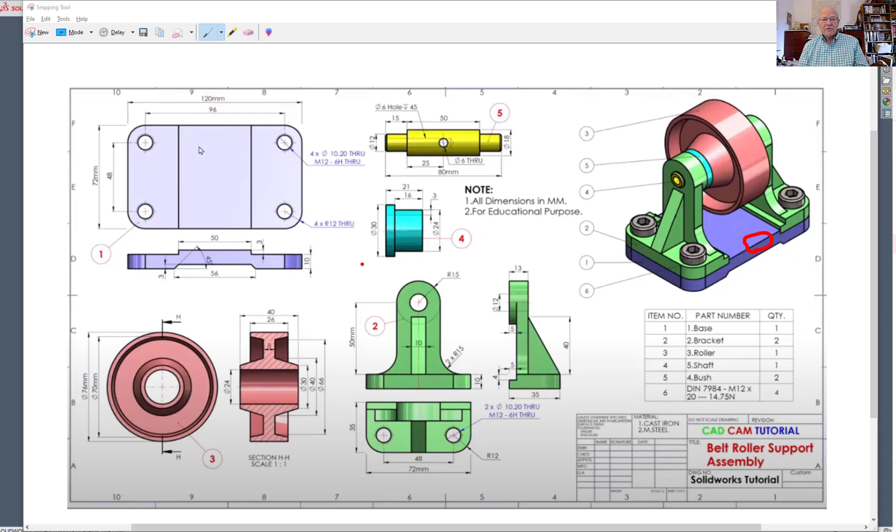Let's go to SolidWorks. There are two ways you can start this. You could make the base as an individual part file and then bring that into an assembly, or you could build the base in the assembly itself. I'm going to do it that way, just so everything starts with the assembly.

So I'll go to File, New, and I'm going to start a new assembly file. I actually have templates set up myself, but you probably won't, so let's start with Novice. Oh, I updated SolidWorks and I haven't yet cleaned up the templates, but that's why we'll just start with a blank template.

Now, the first thing it does when you start an assembly by itself is it asks you, what do you want to use for a part? So it goes right into the Open dialog box for files. I'm not going to open anything, so I'm just going to close that.

Again, I could have made a part and opened that part in the assembly, but instead, when it asks me what I want to do, I'm just going to pick the green check, which just leaves everything blank.

Coming down over here, I want to make sure this is in millimeters, although this is a sort of weird little thing in SolidWorks. Every time I make a part in this assembly, I've got to check those units, and it's quite likely that those units are set to inches for each part.

So I will go to Insert Components, and I'm going to start not with Insert, but with New Part. It all automatically comes in with a little green check, and what it's asking is, put this on the plane you plan to draw on.

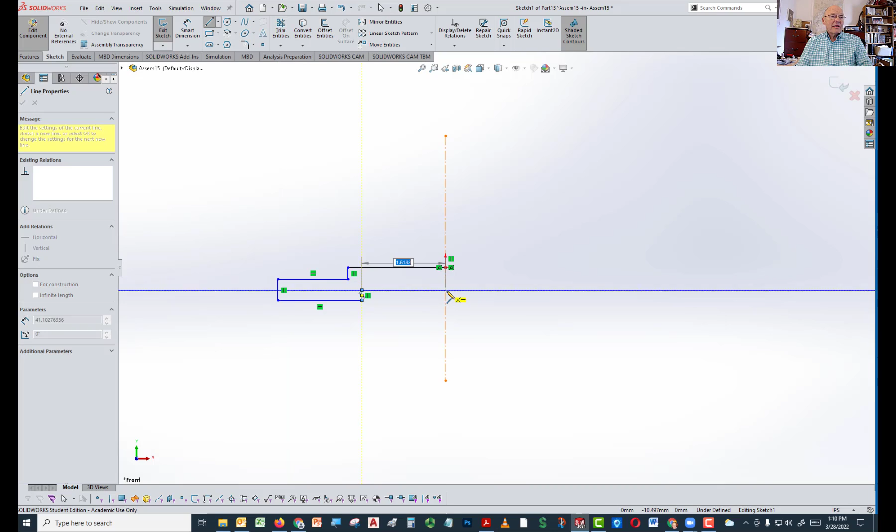I'm going to actually start this right on the origin, so the origin is going to be on the top of the part itself. I'm going to come over, down a little bit, over a little bit, down a little bit, come back, go up, come back over.

You don't have to be very careful with this because you're going to put dimensions on it anyway, as long as it's close. Even if it's not that close, it'll still work. Make sure copy is checked off when you do the mirror on something like this. It comes across like that because it's a symmetrical part.

And you'll notice, indeed, it changed from millimeters to inches when we went into the part files. I'm going to change that back to millimeters before I place any dimensions.

Now the parts listed over here, at the moment it's blue because we're working on it, and everything else is grayed out, but it's the only thing we're currently working on. I'm going to go over here and right-click on the sketch and edit it.

Now I'll start putting my dimensions in now that it's set for millimeters. I'll have to do that for every part we create here. What I probably should have done is change the default setting from inches to millimeters, but that's okay.

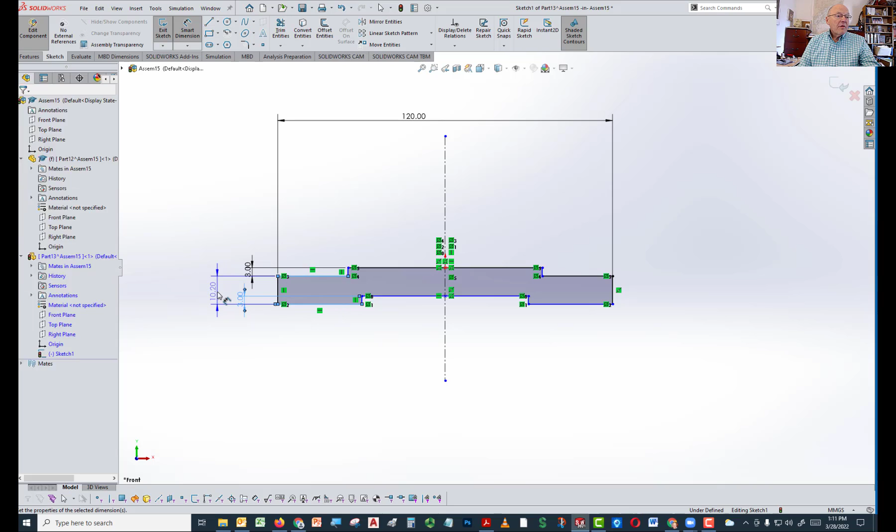So the overall length of this is 120 millimeters. You put that in like that. That depth from here to here is 3 millimeters. The depth from here to here is also 3 millimeters. And then that distance from here to here is 10 millimeters, and that width right here, I've got to look at it and see. It looks like it's 50.

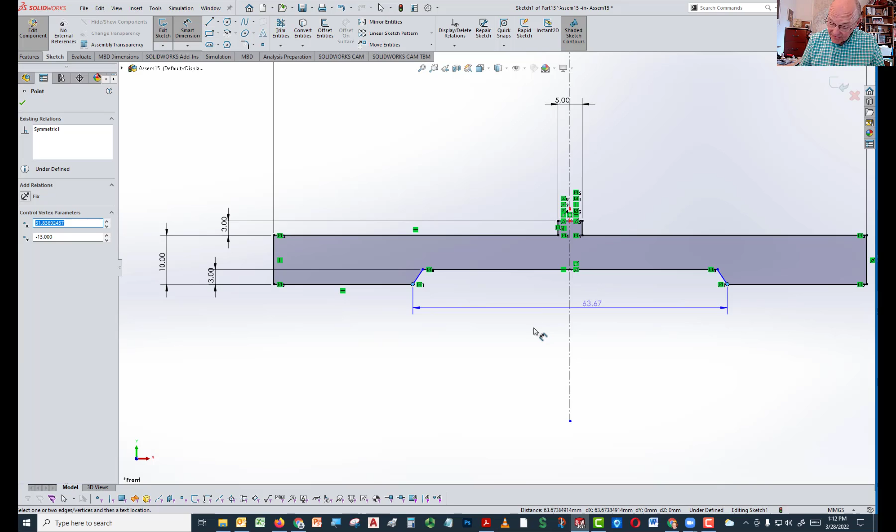Oh, this looks a little different than I thought. It's actually not vertical, it's got a little angle to it like that. You'll notice it changes on the other side as well. So the distance from here to here on this is given as 56.

And now I'm going to have to drag this over a little bit. Oh wait a minute, something weird happened. I typed in a 5, I guess, and not a 50. Didn't even notice when I did that.

There we go. Now what I'm going to do on this is bring that point over a little bit so the angle goes the right way. That angle was given as 45 degrees. So I'll just pick 2 lines here, bring it down, make it 45. And that should be fully defined, and it is.

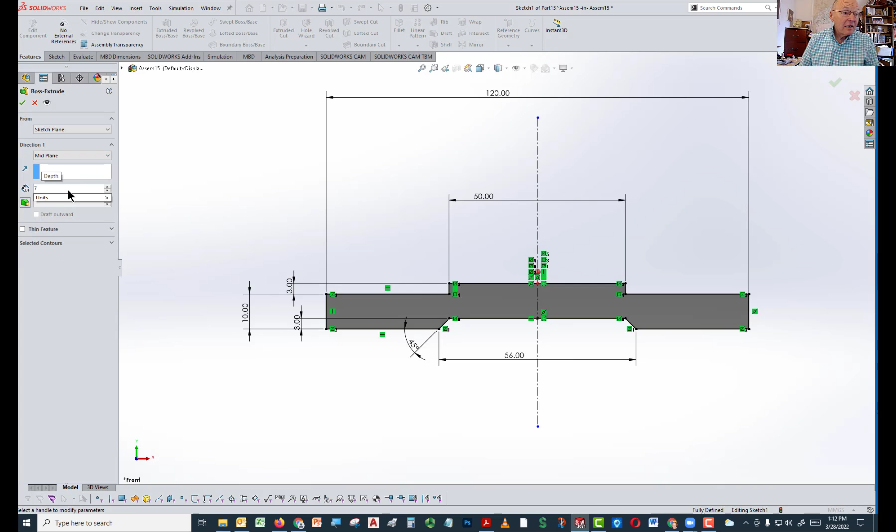Now the thickness of this is 72 millimeters. I'm going to do a mid-plane extrusion. So I go to Features, Extrude, not blind, instead mid-plane. 70, I just said it but I forgot, 72. So now it looks like that, and that puts everything right in the middle. All the planes on this part go right down through the center.

Now I'm not going to put the fillets in yet, because there's always a tendency in a case like this to put in the fillets and then use the center of the fillets. I'll just show you what I'm talking about here. You've got holes here, and those holes happen to be in the same location as the center of the fillets themselves. But if I change the corner fillets after making the hole concentric with the fillet, that would change the location of the hole.

So what I'm going to do is make the holes 96 millimeters apart and 48 millimeters apart by putting the first one in place. And there's a couple ways I could do this. I could measure that from the center of this so that everything stays symmetrical. That's not a bad idea, but I also could just go from one edge in. So it really depends on what my design intent is.

My design intent is to have that always be 12 millimeters in from the sides. Those are the dimensions I'd use. If my intent is simply to make it symmetrical about both planes, then I might put it in the other way. Let's just say no matter what I do to this, I always want those holes to be in 12 millimeters. So that's what I'm planning to do, and that's what I'm going to do here.

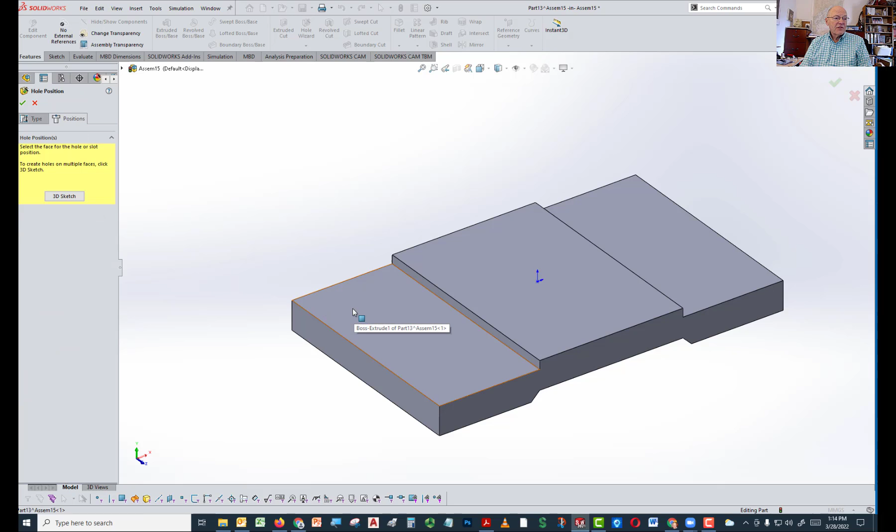So now I'll go back to Features, and on Hole Wizard, we use a Hole Wizard on this. We could just use circles. First thing I'll do is put in the type. Now let's go to position first. I'm going to put the position of one hole in on that surface right there. Now I'm going to dimension that.

When I dimension it, it's going to say 12 millimeters from each side. Again, that's the same as the fillet, but I'm going to put that in independently so that the fillet doesn't control the hole. I could make the hole control the fillet, I suppose. But I'm just going to leave them independent on this one.

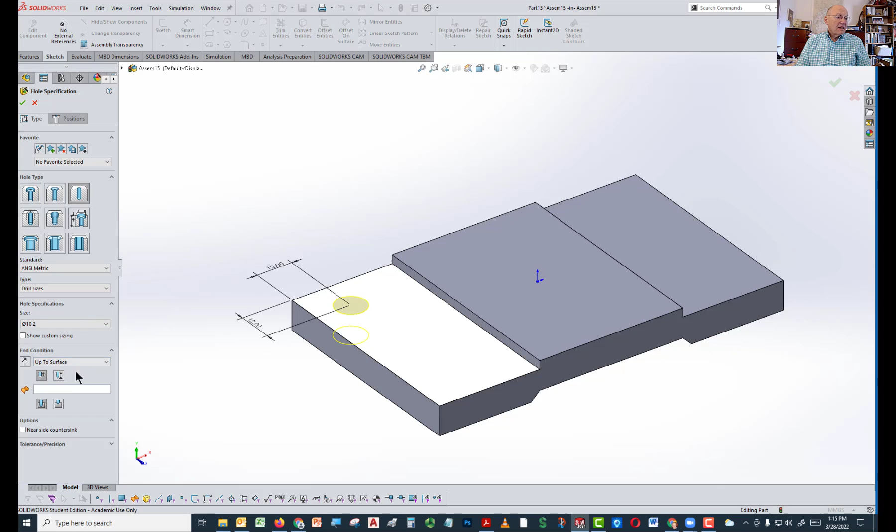All right, so there's my hole. Now I'm going to say I'm done with the dimensioning. I'm going to go back to the Hole Wizard and change the type. It's going to be a drilled hole. The hole size is 10.2. So I'm going to go down under ANSI metric drill sizes and see if there is a 10.2. There might not be, it might not be a standard size, but there is right there. Now I'm going to go up to surface, which I think is always the safest way to do this.

Pick the surface to start from and the surface to go to, and you're less likely to run into a problem with complex parts. The hole's in there like that.

Now what I want to do is mirror this around the planes, not the planes in the assembly. I don't even think it'll let me do that. We'll find out. But the planes in the part itself.

So when I go to do the mirror, I'll go up here to the Features tool, go over to Mirror, and let's just see what it does. Is it even going to let me pick that as a mirror plane? No. In other words, I've got to go to the part itself. That makes sense. I don't want to be mirroring around the assembly.

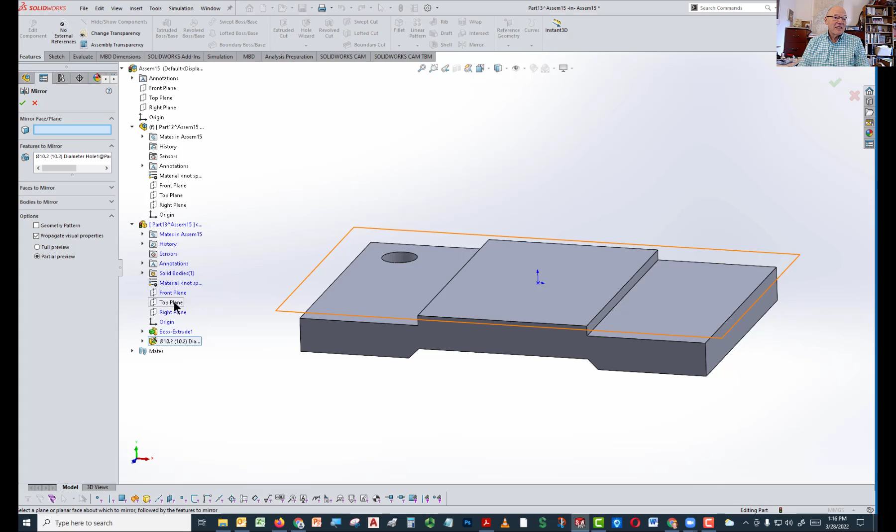I really want to be mirroring around here. So let's go to the right plane, mirror over there, say OK. Now I'm immediately going to go back to mirror, and this time I'm going to go down on the base and pick the front plane. Front plane mirrors the last thing I did, which is the other mirror, so now they're there.

Now those holes are always going to be 12 millimeters in from the sides. Now I can put in the fillets, and this would be a perfectly good time to do it. I put in fillets at the end, almost always. Again, in this case, I wanted them independent because I don't want the fillets driving the holes. Fillets at 12, looks like that.

Now that's everything I can do here for this part, and that's it — the part itself is completely done.

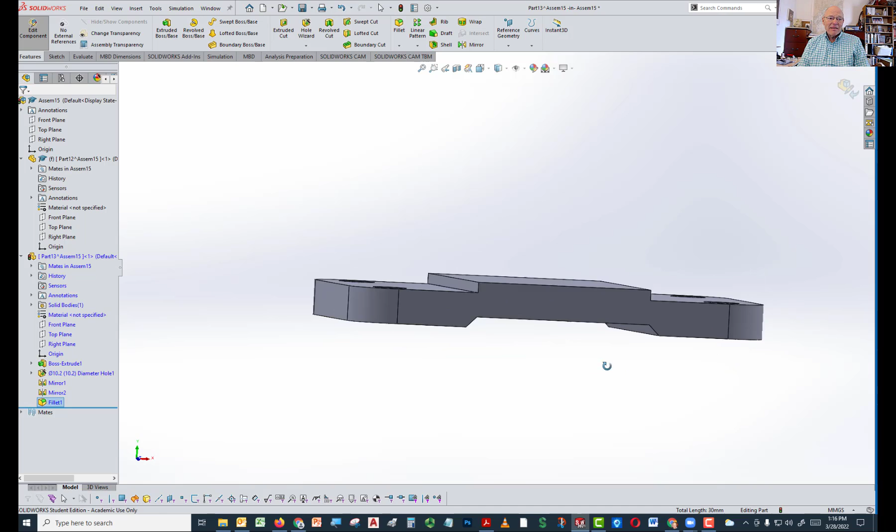What I'm going to do now is create the next part by using that surface to draw on, which means I'm now going to come out of this, and now it turns into a standard part over here. The only thing is, it does show you the way that it's identified here.

It shows you that that's inside the assembly. You can rename that if you want. Wouldn't be a bad idea to rename it bottom plate, for instance. So I can do that, but it's still inside the assembly.

Now when I go up to insert components, I'm going to insert a new part by making a new part in the assembly. And now again, I'm going to get that little check — don't pick anything in the assembly itself. In this case, everything from now on is going to be based on that part.

That makes sense? Yes. Well, let me just take a look at this. Let's think about how we're going to do that. I could build the base on this, and then once I've built the base, I could build up this part right here. Sure, let's do it that way.

So I'm going to put my sketch on the bottom of this. I'll build the base first, and then I'll add this other part to the base. That base goes all the way in, up against the edge, so it sits right up against that edge right there.

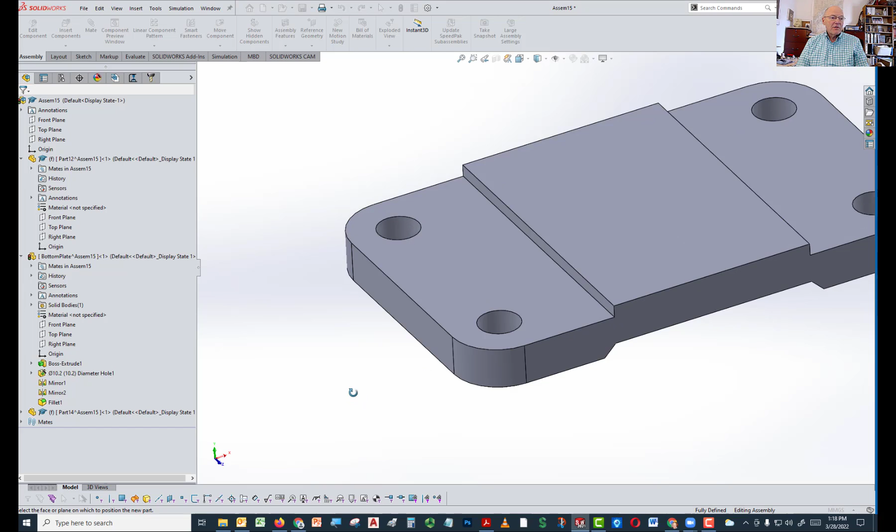So I can either use that surface or this surface from the vertical line, or in fact I could use that front surface. Let's do it on the top. Again, this is the kind of decision you make based on what you think will be easier down the road as you start making changes. So I'm going to pick this as my surface.

Now I'm going to convert entities. I'll do a convert entities, and I'm going to pick this surface right here, and I can pick that surface like that. Now I'm going to convert all the entities of that surface onto the surface that I'm sketching on.

I'm also going to convert entities again, and I'm going to pick the holes. Now that makes the holes of the part I'm making dependent upon the hole size in the part I just selected, the base. It also makes the overall outline the same — it's going to be controlled by whatever changes are made to the bottom plate.

Pick OK, and that looks good. I just need to know how thick to make that. Let me look at my notes.

10 millimeters will do it, so then I'll go over to features, extruded boss, and make it 10. This one's going to be blind, so it goes up.

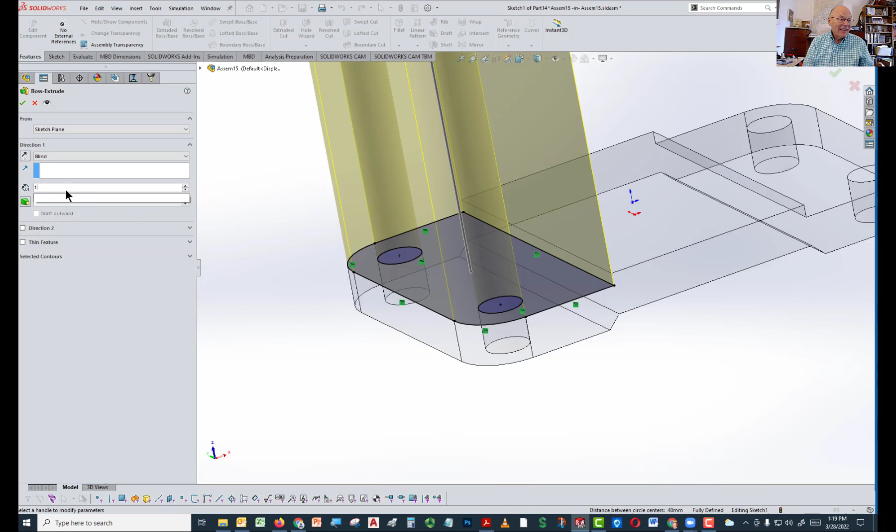Oh, and once again I forgot — every time you make a new part, it goes to whatever the defaults of the standard default value are. So when I typed in a 10, it made it 10 inches. I'm going to type a 10 again with an mm, and now it's 10 millimeters.

Now it's probably a good idea for me to change this to millimeters for the rest of these, so I'm going to do that. So now as I'm building this, I get the right units in there without having to type in the mm.

There's a little notch out of this right here, so I'm going to put that in there right now. I'm going to sketch on that surface, put a little corner rectangle, start it here, and drag it off like that. Looking at the drawing, that notch is 4 high and 5 wide. So it's 5 this way, and 4 this way.

First time I've made this particular part, by the way, but that's okay. I'm going to do this in the same way that you would build something for the first time. 5 and 4. Okay, now I'm going to do an extruded cut.

On an extruded cut, I think your best bet is always to go up to surface. Now there are times on really simple parts where you can go through all or up to next, but up to surface guarantees that your intent is always maintained. You know where it's going to start and where it's going to stop, no matter what.

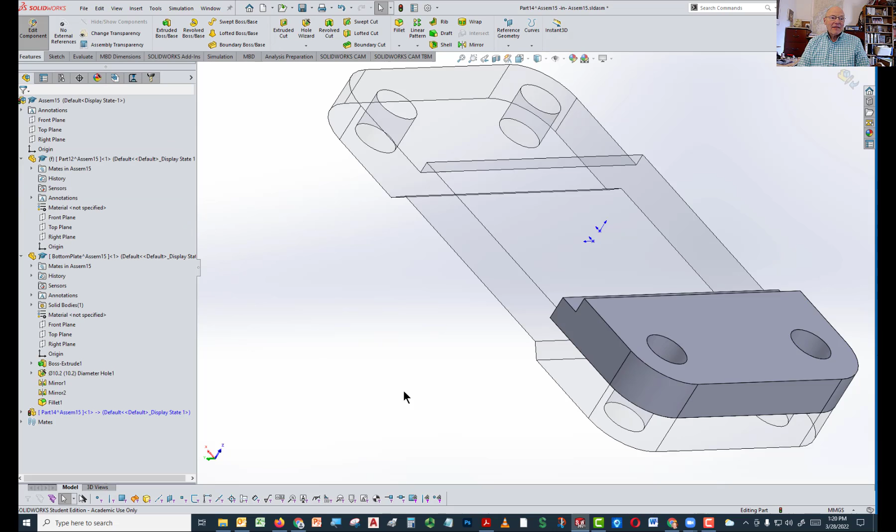Right now what I want to do is build in the piece that sticks up, and I'm going to do that by putting it on this surface right here. I'm going to build it on that surface. So I'm going to go to Sketch, pick the sketch, do that one. Let's look at this from the right so I can see what I'm doing.

I'm going to put a center line on here, and that center line is going to go from here right down to there. Now I'm going to draw a circle at the end of the center line, and then, since I am in millimeters, make that circle the diameter of the top of this, which is going to be 30.

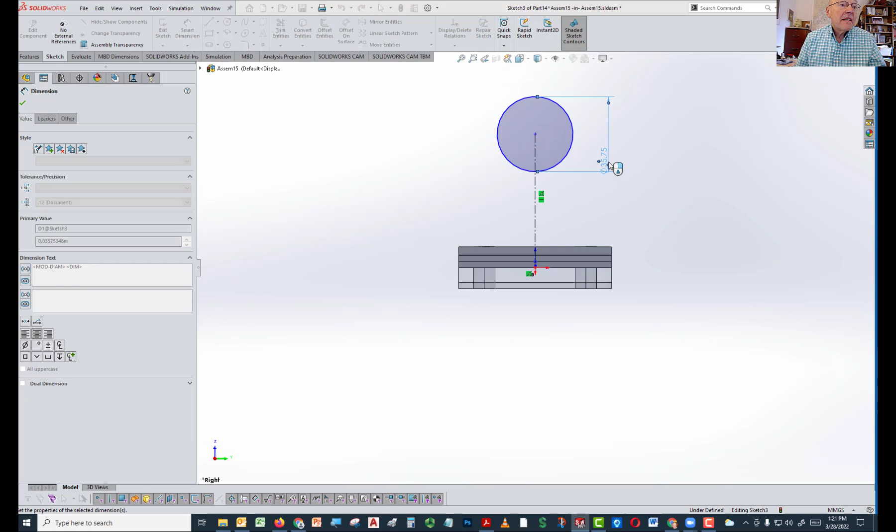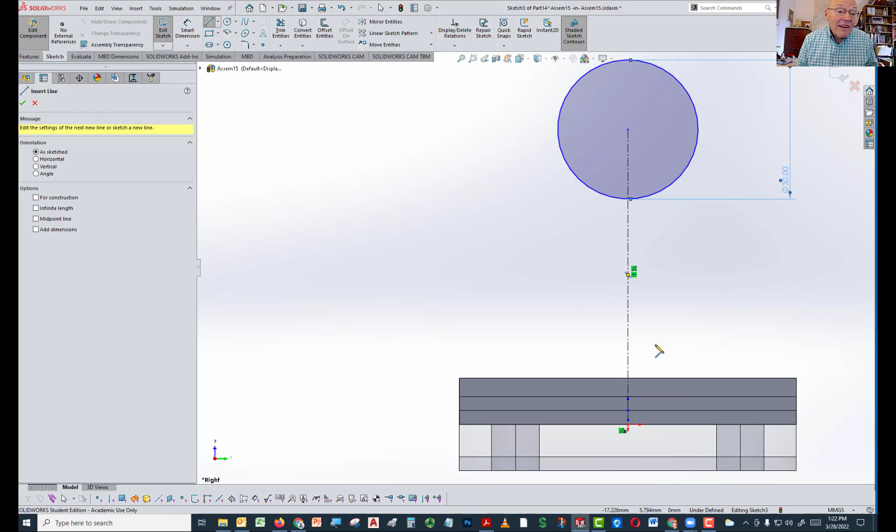Now I'm going to start sketching. I want to make sure I sketch on where I really mean to be. I want to start sketching on that line right there. So we're going to go to the line command. I'm going to start on this line, start right there, come over and have it stop here, and I want it to come up till it touches here.

Is that what I want? Let me see something. No, no, it's not what I want. And what I want to do is sketch up here. So I just started in the wrong place. I'm just going to start over again and get rid of that.

I want this to be on this surface up here, so I'm going to go to the midpoint of that line to start with. I'll start right at this midpoint if I can get it to come up. And there it is. Then I'm going to come over here to that surface. Now this comes up above, it comes up higher than the top of that, and it's 10 millimeters, so we'll put that in a minute.

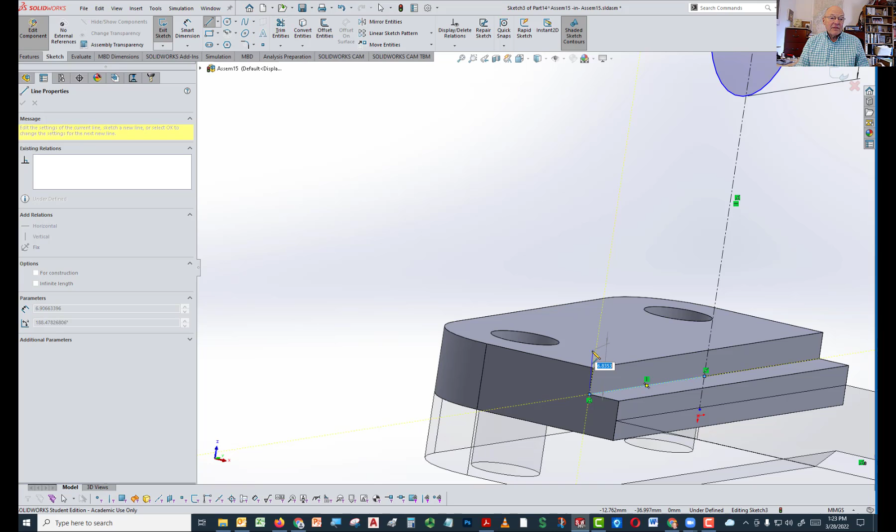Also in a minute we'll change that so it's vertical. So then it's going to come over here, and it's going to come over until it lines up with the quadrant of this top. I can go and acquire that quadrant and bring it down. You can see it's got a tracking line. I can also add that as a feature later on.

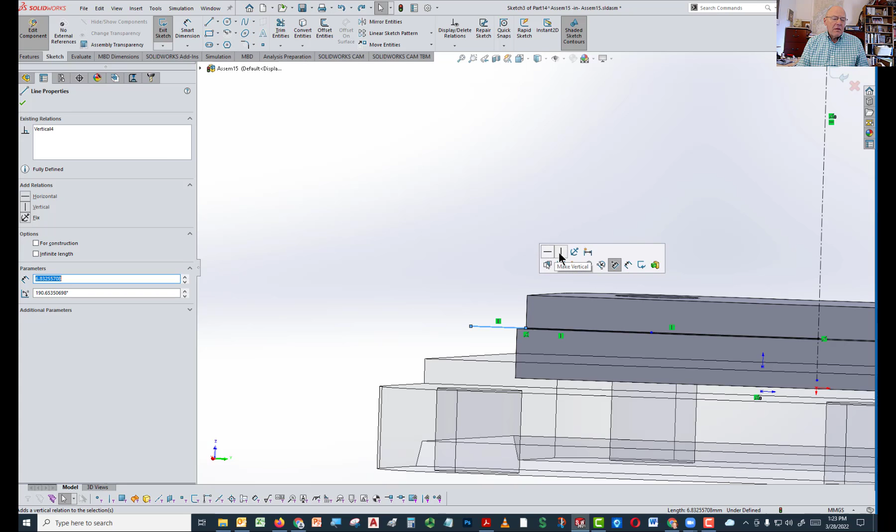Now I just need to make this vertical, just because that's a little sloppy. I need to make this vertical. No, why not? Because of the orientation and the way... all right, well, it's going to have to be horizontal. It just thinks it's drawing in a different orientation than I did.

That is a surprise a little bit, I'm not sure why it did that. All right, well it did, so that's the way it is. Now I'll go ahead and draw a line from the quadrant of the circle and go straight down to here, and make sure that's also... and it's not, so I'm going to make that. There we go, I just need to reverse my thinking. I've got this turned 90 degrees according to it, apparently. That's what's going on with that.

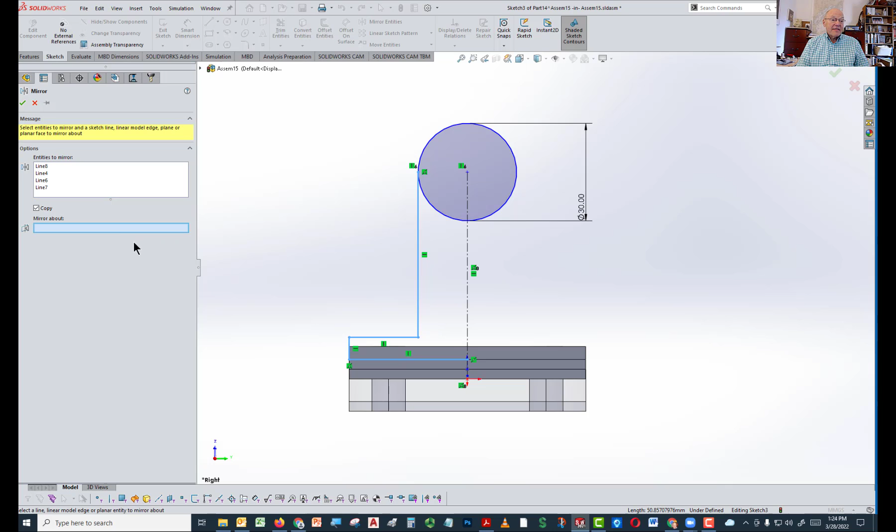Now what I'm going to do is mirror everything. I'll mirror this line, and so I'll mirror all of these lines, about the center line, bringing it over here like that.

Now I'll add these dimensions in. You notice I haven't really put many dimensions on here yet, because I'm letting the base drive a lot of these dimensions.

And the other thing I need is a distance from here, and that is given on the part from the top of this. So that goes from here, and that dimension is 50. Looks like that. Now I'm going to trim out.

Where's my trim? Right there. I'm going to trim out this and this. That should be fully defined, and it is.

I might as well go ahead and put the hole in this, because it does go all the way through, and it is concentric with that. So now I'll make that hole size the size given, and the size given is 12. So there's a 12 millimeter hole there. That's 12 as well. All right, we have a fully defined sketch now.

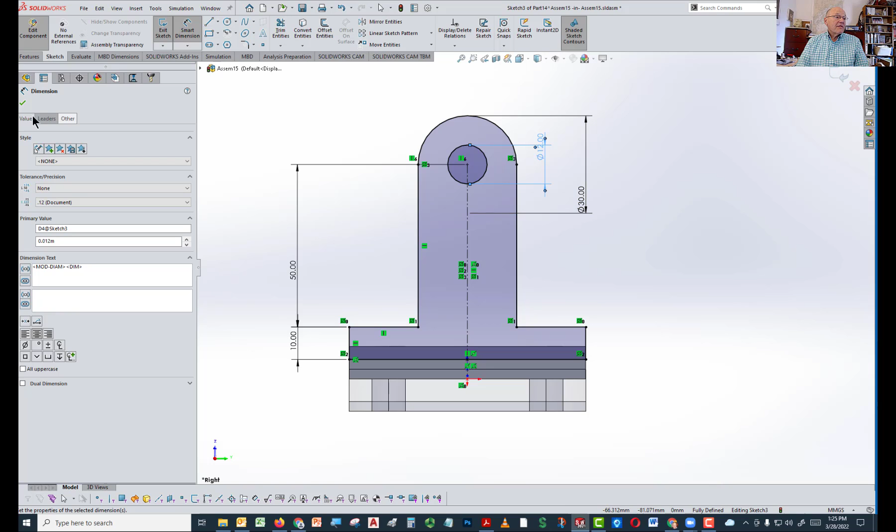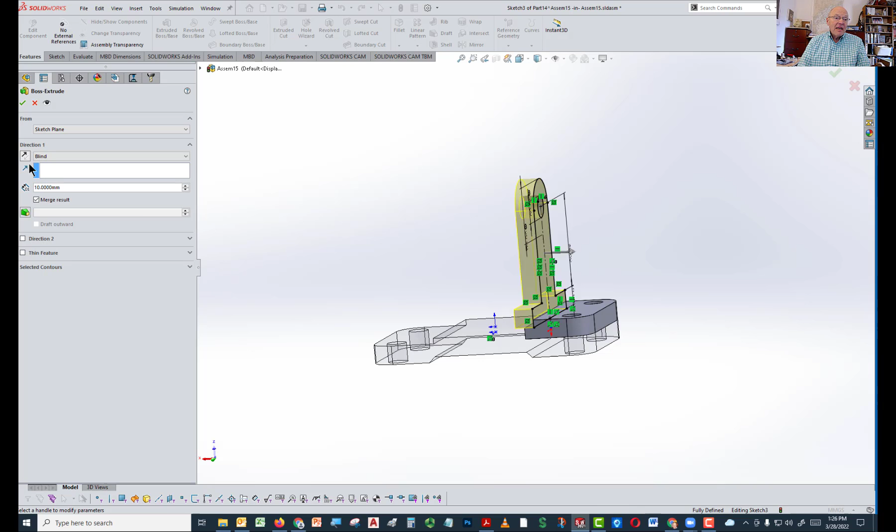Come back over here. What I'm going to do is extrude that 10 millimeters. When I do that, I want to make sure it goes in the right direction. It's going the wrong direction now, so I'll flip it. Now, it doesn't hit those holes, so it's not going to cause me a problem now. It's just going to merge, as long as you've got merge selected over here.

So now that's what the part looks like, believe it or not, with that little step in it. Not sure what that step is for, but it has the little step. And we can move from there.

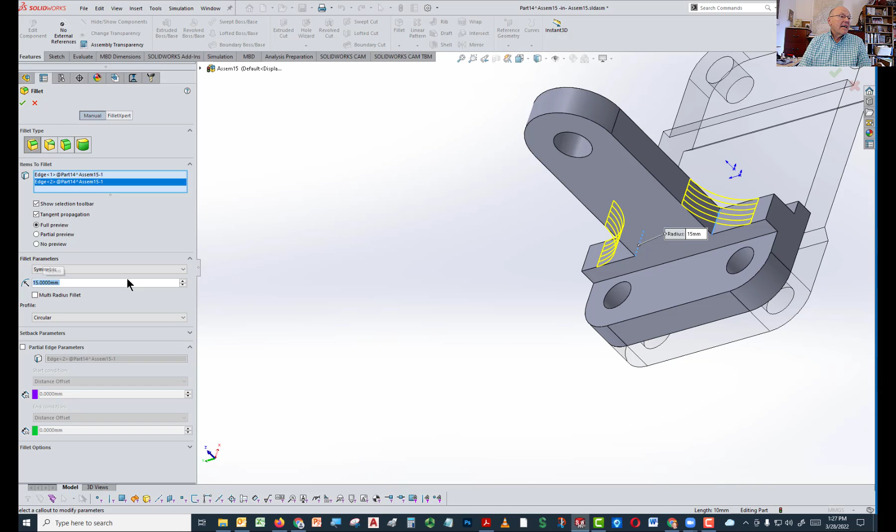Now there's a fillet in here that is part of the overall shape itself. That fillet has a radius of 15. I'm going to build that in now, just in case it causes anything to be different about the rib I'm about to put in. I'm going to take both of those, make them 15. Looks like that, and this is mostly what we have here now.

Now there is a support rib on this. That support rib goes down here at an angle, and in order to draw that, I'm going to do this. I'm going to look at it from the front, just like this. I'm going to draw on the plane of this that goes right down through the middle. So I'm going to do my sketch.

When it asks me what to select, I'm going to open this up on the inside, find the part that I'm currently working on, and I'm going to pick the front plane. I'm going to pick the top plane of that part. That's just the way it was oriented.

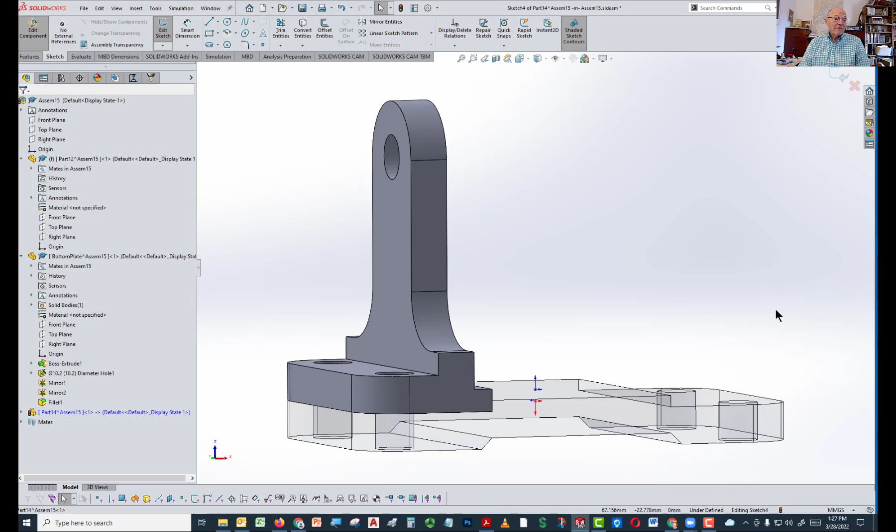Now if I look straight at it, I can draw a line that goes from that corner right there and goes up, and it stops below, stops up here someplace. Just make sure you don't hit the midpoint, because you're going to want to dimension this properly. And the dimension for that's going to be from here to the top. Should be 40.

Now that's fully defined. Now I'm done with that. That's my whole sketch. I could actually draw a triangle and then extrude it. I just want to show you how to put a rib in. To tell you the truth, right now I probably would have just drawn in a triangle and extruded it mid-plane, but I do want to demonstrate the rib function.

So in this case, I get out of the sketch altogether, go back over to features, and then I find the rib tool, and the rib tool is right there. It asks me to select a plane, a planar face, or an edge in which to sketch this thing. Instead, I'm going to pick an existing sketch. That's the option down here, and that existing sketch is going to be that.

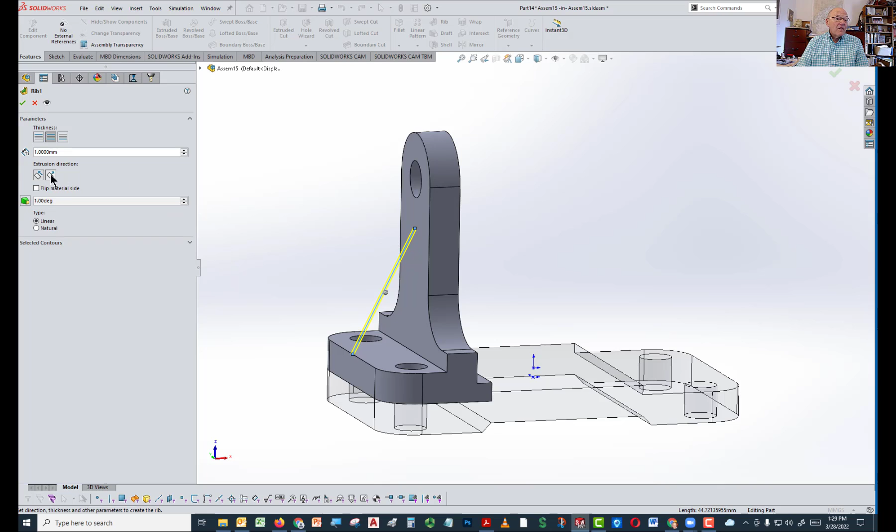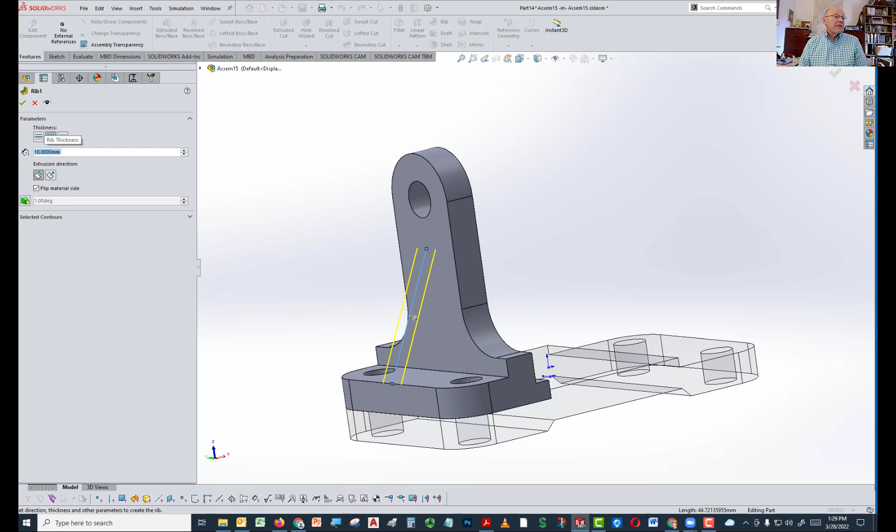Now what I want to do is make it go in that direction. Material side should be down here like that. And then the width of the rib, the thickness of the rib, was given as 10. I do that, pick the green check, and then it lays the rib in like that. That's a very helpful tool, so that's why I wanted you to see it.

There are no fillets on this, which is a little bit of a surprise. I think this would actually be a cast part, but the one that was given doesn't have fillets, and that's okay. We're just going to make this to demonstrate something anyway. But generally speaking, I would guess that's a cast part, so you'd have fillets all throughout here.

Come back out. Now I've got that part, looks like that, and it's right in place. Now what I'm going to do is use the mirror function in the assembly. The mirror function in the assembly is under linear component. I don't think it's anywhere else up there. No, right there.

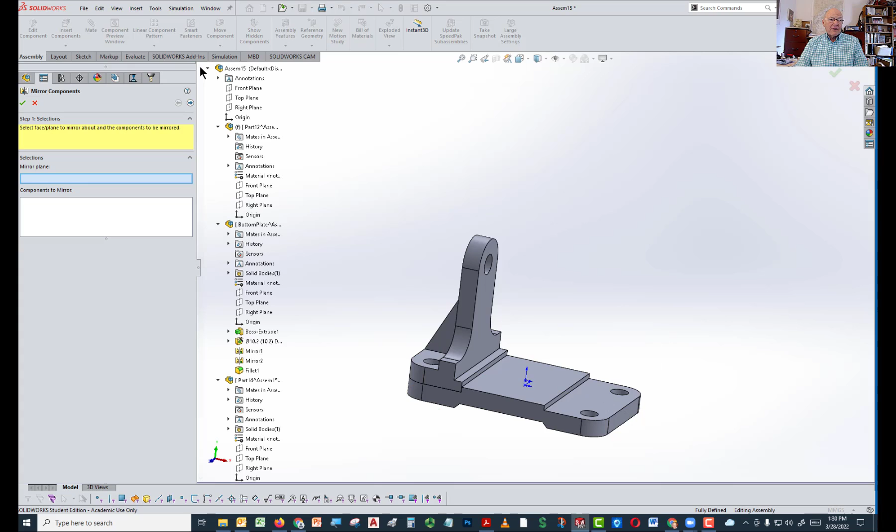So mirror function, and we're going to pick, once again, the mirror plane that goes down through the base, not the plane that goes down through the assembly itself. So I'm in the base, I'm going to the right plane, and then I'm going to pick the feature, or the component, that gets mirrored. That component is this one. Pick the green check, it comes over like that.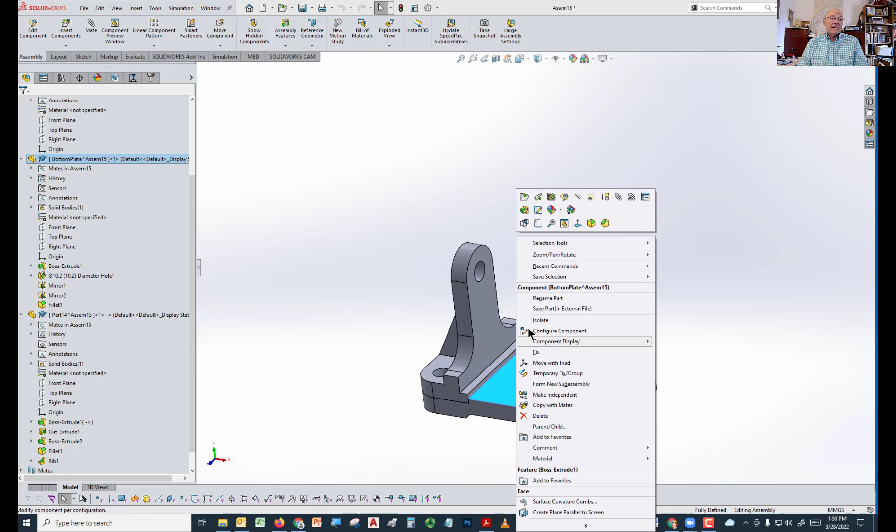Now so much of this was based on the base itself that if I go and make changes to the base, those changes are going to be migrated through. I'm just going to pause a moment here to show you that. So I'm going to edit this part right here, edit it in place. Everything else goes like that.

But watch what happens now when I come up here and make a few changes. I'll make this whole thing a little bit longer. I'll go in here and say let's make this 140 instead of 120. The whole part gets longer. You may have noticed that the parts I made here stay in place right now, but we'll keep going and you'll see in a minute what's going to happen with that.

So now I come back out of here and I'm done with that edit on this one. I'm still editing the part, but now you'll notice that the base of my side pieces, the axle supports, also got longer as well.

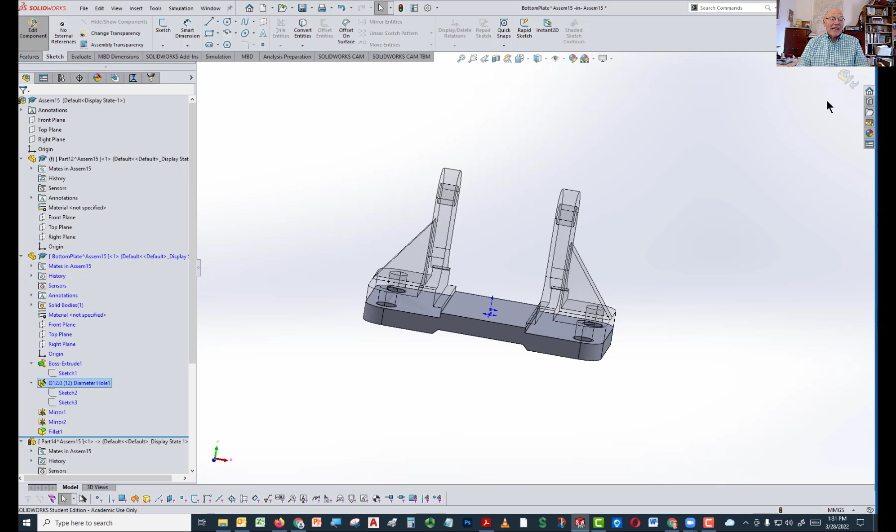Now what I want to do is go in here and edit the hole size. I'm just going to change the hole size so that instead of 10.2, let's make it 12. That means all these holes are going to get bigger. When I come back out of that, now everything has gotten bigger. The hole sizes have gotten bigger, the sizes in the axle supports have gotten bigger, and the axle supports have moved.

That's the purpose of doing top-down design and assembly. I'm going to pause my video and go back to the actual dimensions because I want to show you a few other things, but I do want to work this out with the dimensions that are there. Okay, now what I want to do is build the other components.

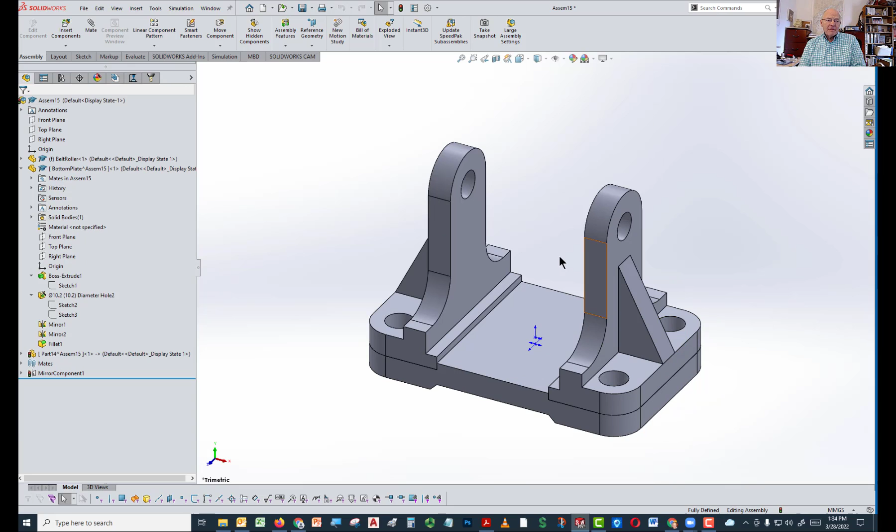I'm going to start, well, I could start with the axle. Let me look at something here. The way this is assembled, we've got a bushing that goes into the wheel and is going to be pressed into the wheel and then be free to move back and forth. So it's going to be controlled by the wheel.

The wheel is going to be controlled. Actually, it should be free to move back and forth a little bit, and the axle is going to be controlled by the bushing and by, looks like, the length of the 80 millimeters. I can't tell if that sticks out a little bit or not, but we'll find out.

So let's do this. I'm going to build the wheel right now, and I'm going to make sure the wheel is on the axis that goes down through the center of those holes. That's the main thing I'm concerned about. I probably will leave it so that the sketch is free to move back and forth, because there's probably a little bit of play in this wheel. I haven't really thought about this yet, or haven't done it yet, but let's try and see what happens.

So I'm going to start looking at it from the front. And again, I'm going to draw on a plane based on the base. So I'm going to draw on the front plane of the base. I'll go over here to sketch. Yeah, because I want it centered. So I'll go over here to sketch.

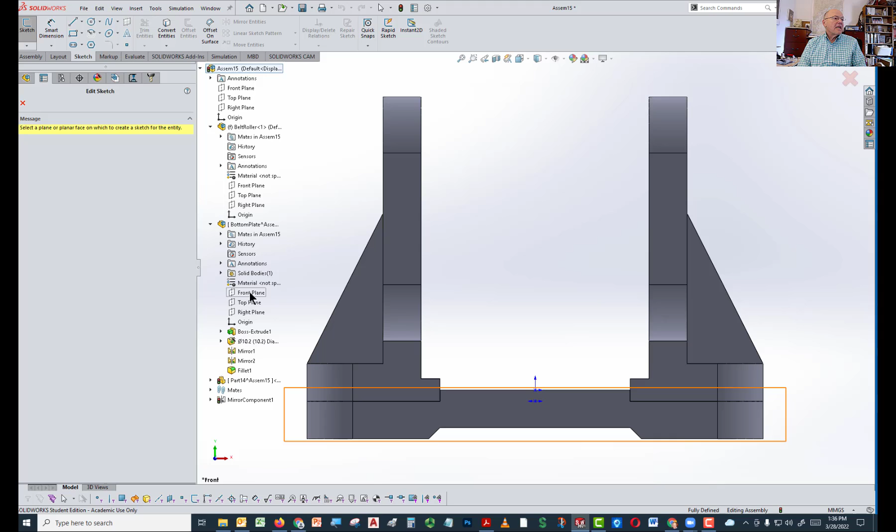Open this up, find the base. Bottom plate. Yeah, well, okay, that's the assembly itself. So we need to go down to the bottom plate. And on the bottom plate, we're going to pick the front plane.

All right, now I'm going to draw. I want it in the context of the assembly. I'm doing that on purpose. So what I'm going to do is draw a center line. I'm going to have the center line go right down through the center hole of this. Now the center hole of this is something I can't pick directly, but there are a couple of things I can do here.

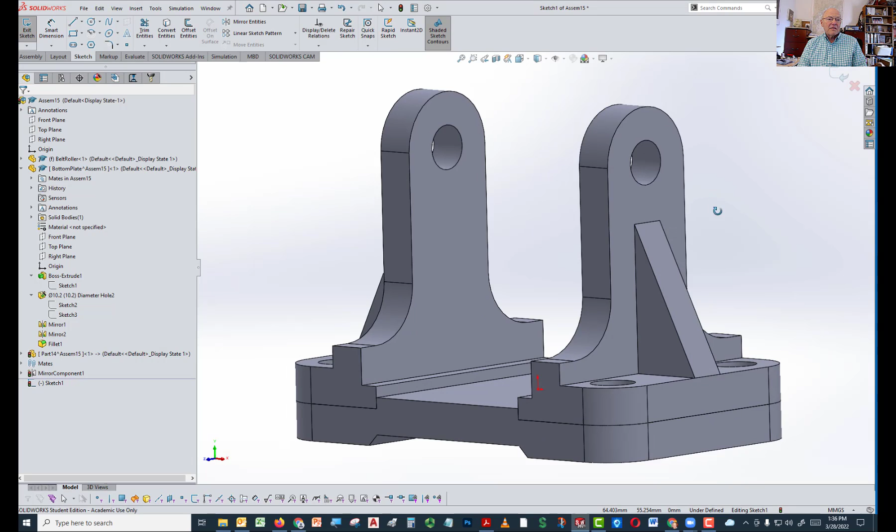One of them is I can turn on the center axes. Those center axes are the center axes of all the individual parts. And it's not showing for some reason. Oh, there they go, I had to turn on viewing. So you can see that when I turn those on, I have a little axis right here. So what I'm going to do is use that axis as a way of rotating.

I'm going to use that axis as a way of rotating the wheel around the axis itself. So I'm going to draw a new line that's connected to both of them. I'll come up here, go to the center line. What I want to do is snap to the axis.

I'm going to look at it from the front. I'll pick the axis right here and bring that all the way through here. That's just going to locate it up and down. I'm not concerned about side to side, but notice that's black now - I can't go up and I can't go down. So it's associated directly with the axis of that hole. If the axis of that hole moves, this moves too, and that's what I'm after here.

Now I'll start drawing the cross section of the wheel. To do that, I'll draw a line with a center line that comes down through here. But because I want to make sure the wheel is free to move back and forth, I'm going to delete that so the center line's free to move, and I'm going to use it as a way of mirroring the wheel.

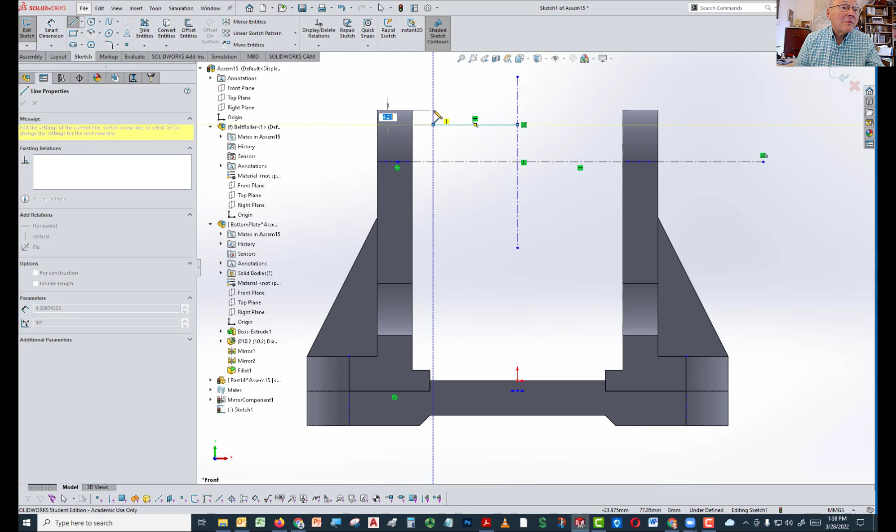So now the wheel is going to start here. There's a hole in the wheel, so we'll get up high enough for the hole. I'm going to come over, come up at an angle till about here, come straight up from there. Looks like we have another angle coming up, doesn't go quite as far. Comes up like this and then comes back like so. That's the rough shape.

Now I don't need to bring this center line up, but I'm going to do it anyway. The main thing is that it's vertical - that's my big concern here. Now I'm going to mirror these. I may decide I don't like what I just did, but we'll find out. So I'm going to mirror this over to here, like that.

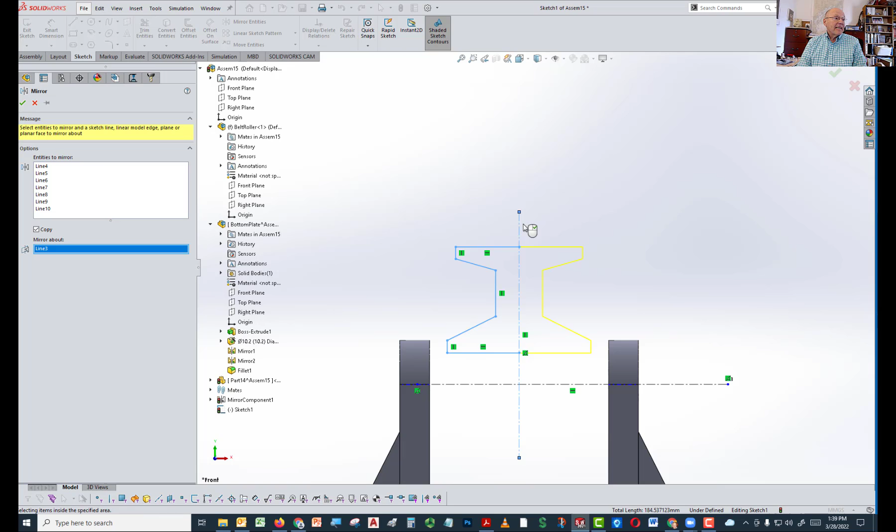This is going to be one of those cases where this is not going to be fully defined when I'm done. I think that's what I want, because I want to make sure it's still free to move back and forth so it has whatever play it needs, but that it is in fact defined in relationship to this. So I'm going to put a dimension on here from here to here, but I'm not going to nail that down side to side. We'll see how that works.

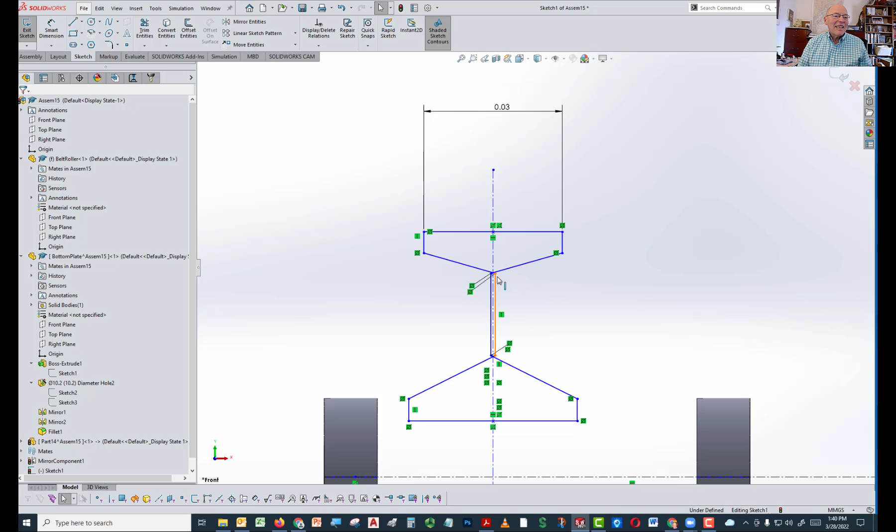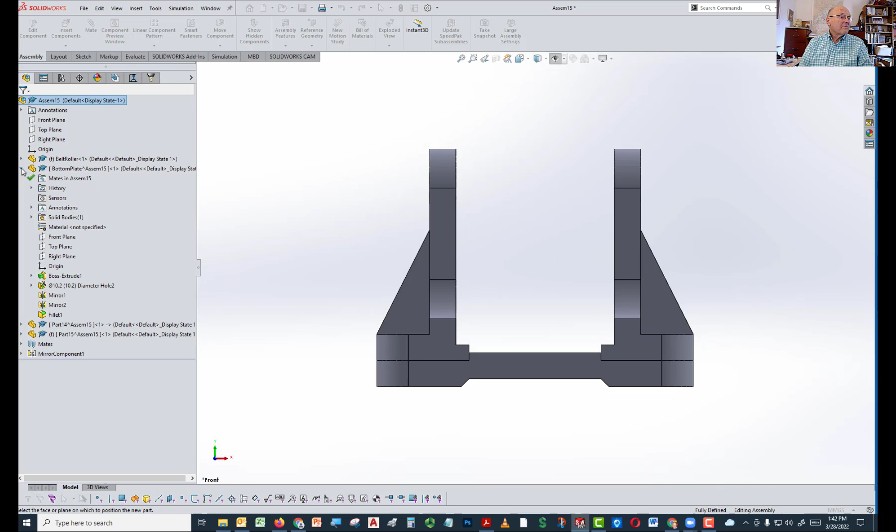Okay, now I want to make another component, so I'll come back over here to assembly. Under assembly, I'll say let's insert new part. Comes in as a new part. I'm going to draw it on the front plane of the base - that's where I want it located, because I want it centered on that. So I'll open up the bottom plate, which is this one right here, and I'll take the front plane of that, like so. Everything else disappears on me.

Once again, it changes to inches. I need to change that back to millimeters. Okay, now what I want to do is see the axis that goes down through the middle of this. So I'm going to come up here and turn those things on. Right now they are turned on.

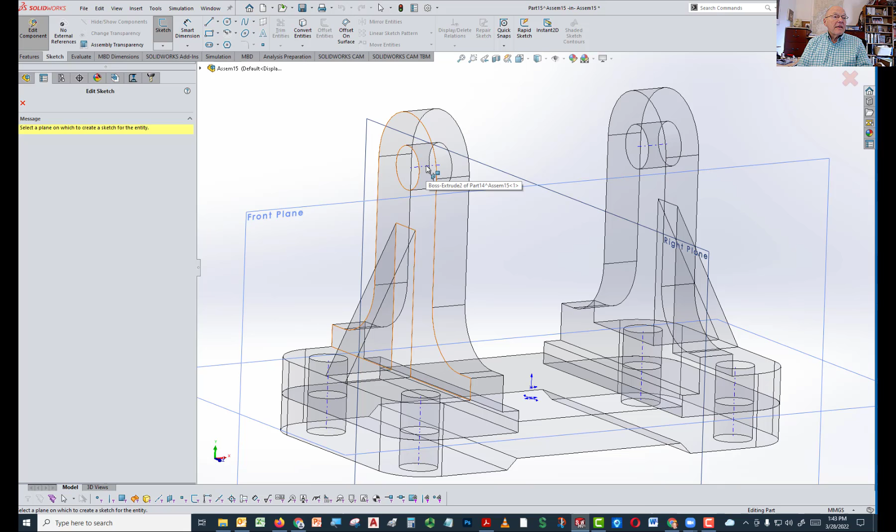Okay, so that axis right there is something I'm going to use, because what I want to do is draw a center line that is coincident with the axis on one of those, or actually both of them. I'm going to build the wheel around there - that's what I'm after right now. So you can see I can get a hold of that right there. I'm going to start by drawing a center line. I want that center line to be... can I get that or not? Let me see.

I guess the reason I would like that center line, that center axis, rather than that edge right there—that's a tangent edge, the extrusion of the tangent edge. I could do that, but the only issue would be if I ever wanted that round to have a different center than the hole, and that's not likely to happen. So I can actually use that tangent edge in this case.

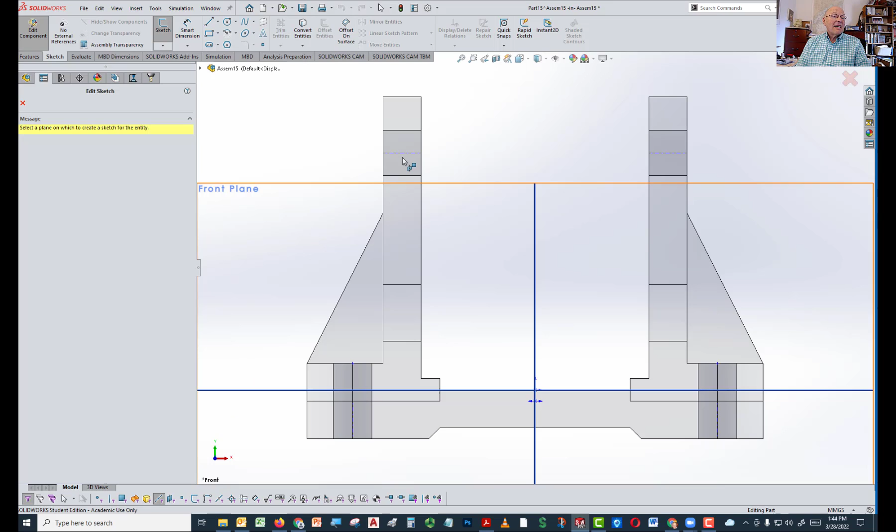I'd like to be able to select that axis. Let me see something here. If I go down and filter axes, and say all I want to do is select axes, that's the only filter that's on.

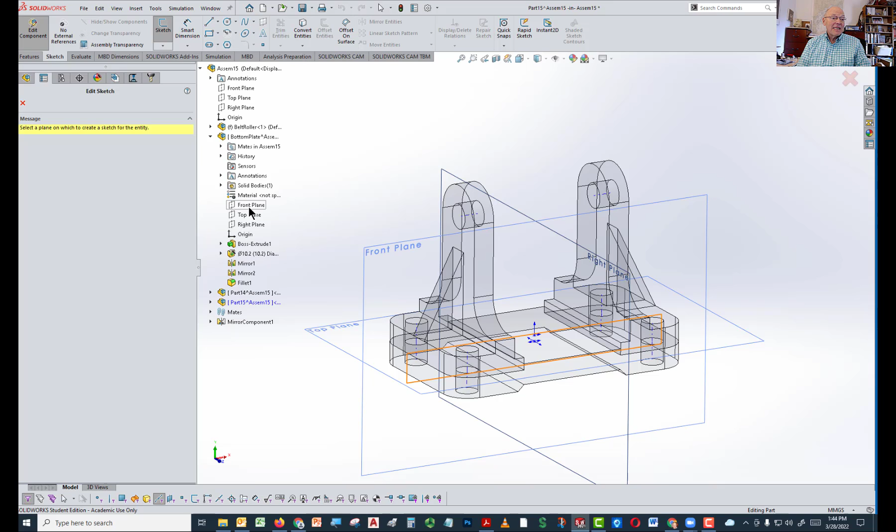First, since I'm sketching this, I have to sketch on a plane. So it's asked me to pick a plane, and the plane I'm going to pick—now I'm making the part on this plane already, but for my sketch I also need to be on a plane. So I'm going to go back and pick the front plane again. Now I should be able to draw a line, and I've got my axis set as my only filter, so I should be able to pick—yep, that is picking the axis. That's exactly what I want.

I want that axis to control the location. So I used one of the selection filters, but I wasn't selecting that tangency. That little filter that shows up tells me I've got a filter on. I'm just going to go turn all the filters off now so that I can draw the way I want.

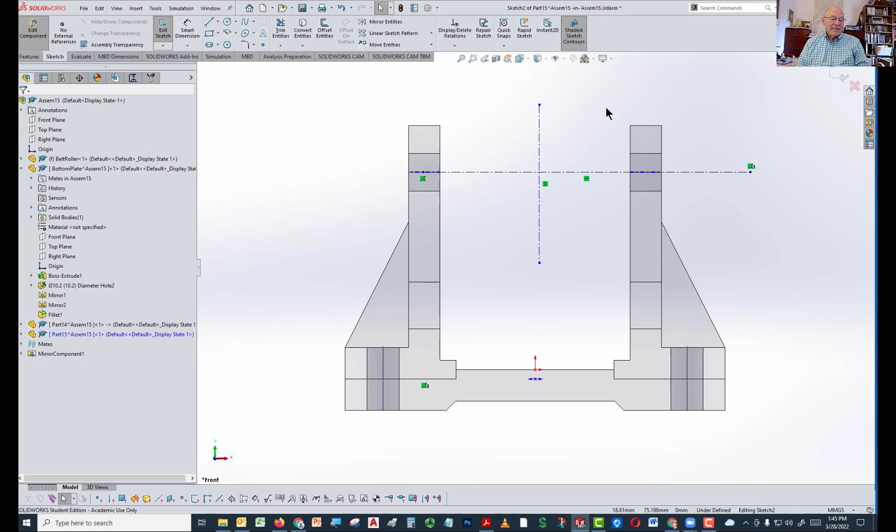Now what I'm going to do is put another center line that comes down through, but I'm not going to center this—I'm not going to actually put this on the origin. I'm just going to make a vertical line, because I want to make sure the wheel is free to move back and forth. Now I'll draw the wheel in here and rotate it around that axis right there. That axis is controlled by this axis, which means that hole moves—it's going to move the axis of the wheel, and as a result the axis of the axle that goes through there and the bushing.

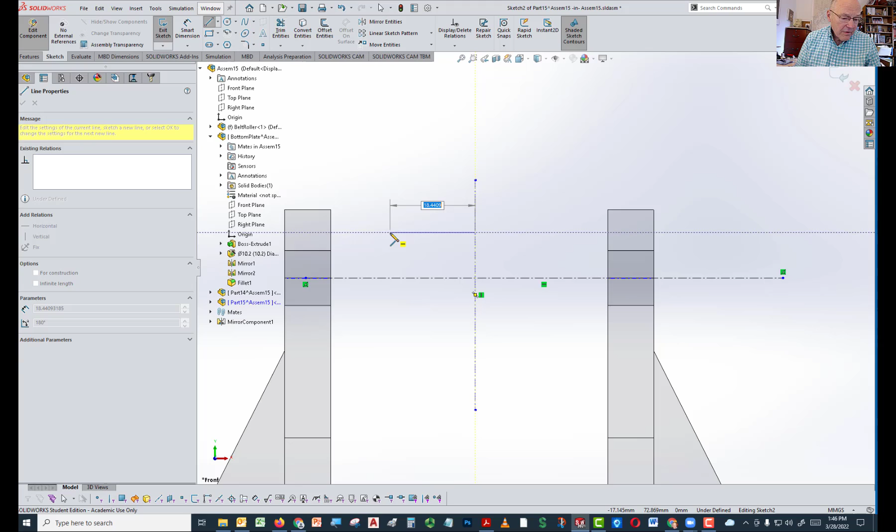So now we'll do the sketch of the wheel, and it's going to start here because it's got a hole in it. Just looking at the shape, it goes up a little bit, comes up at an angle. From there it goes up quite a bit, about like so. Then it goes up at another angle, a little bit shorter, comes up like this, and it's going to come back, and I'm going to line it right up with that center line. You don't need to pull the center line up through, but I want to make sure they're connected, so let's do that. There we go. Now I'll go ahead and put my dimensions on here.

Well, before I do that, let me do the mirroring. So I'm going to mirror the entities that I just created about that center line right there.

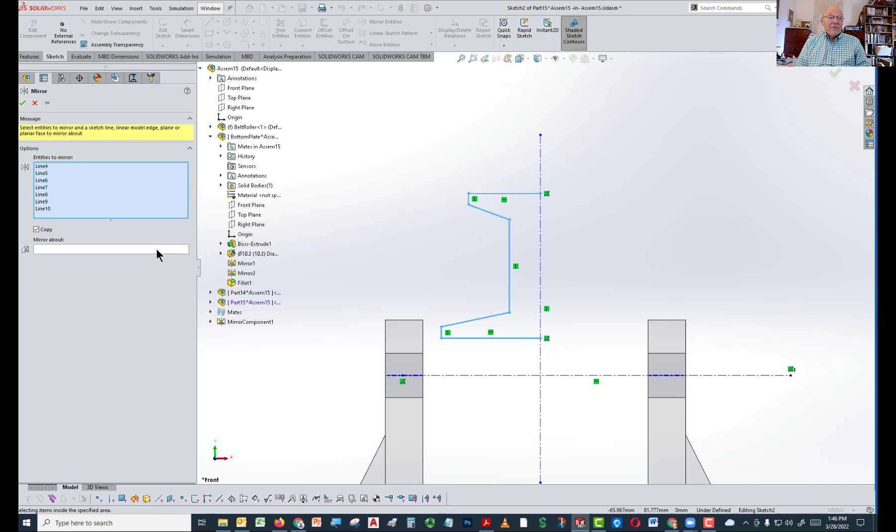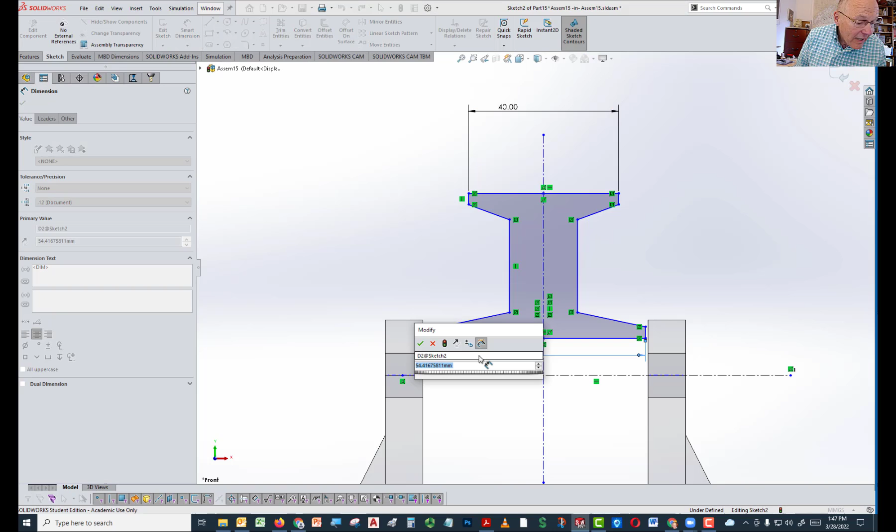Now the wheel dimensions are off fairly considerably, but bring that up here, and that's going to be 40 millimeters. And this one down here is going to be—oh, actually this is the one that's 40. That's 40 millimeters. The one at the top is actually only 26 millimeters.

And then this part in the middle looks like 15 on my handout. I'll look at it on the screen if I have to. 15 does not look right. Let's try 10. 10 looks a little better. Let's go look and see what it actually says. 8. 15 was bad, 10 is not good, 8 is better. There we go.

Now the other dimensions on here: the hole size is 24, so the distance from here to here, and then down below, I'm going to make that 24. And the distance from here to here, bring that down below as well—that's going to be 30.

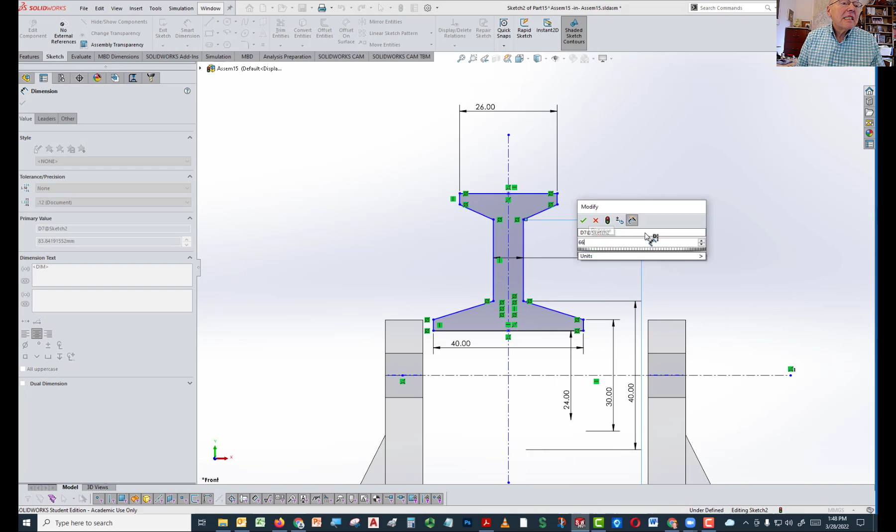And from that point, that's going to be 40. And then 66 to here. Looks like that. And then the overall dimension of the wheel itself is 76. So the wheel, bring that out here, 76. And then this distance right here has been given as a dimension of 70.

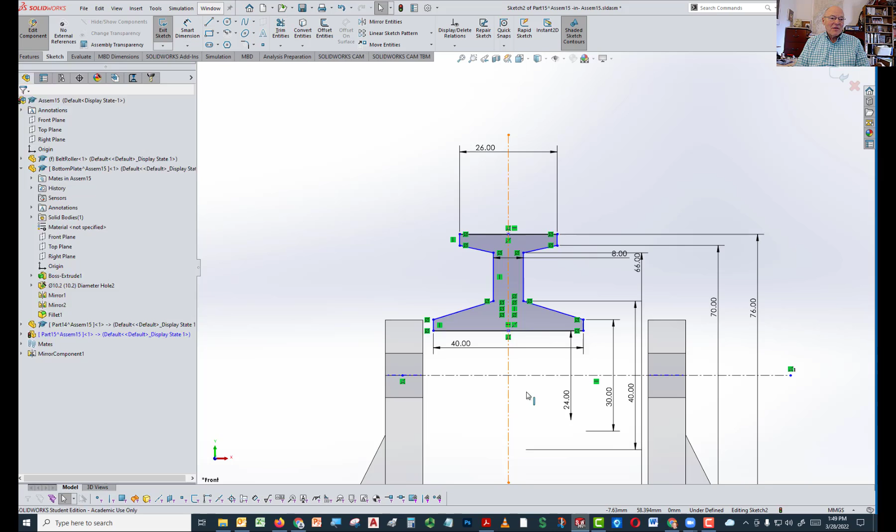Notice that some of these things are black and many are not, they're black only where it's defined. I can still move this back and forth, so the wheel is free to move. That's going to be important since we'll need a mate between things later, probably a limit distance mate, or I'll center it with a mate between the plane of the wheel. But I'm going to try this and see how that goes.

Now I want to do a revolve. Go to Features, Revolved Boss/Base. I'm going to pick this, and it gives me the wheel. Come back out of that part, and it looks like that. Let me go get rid of my filters.

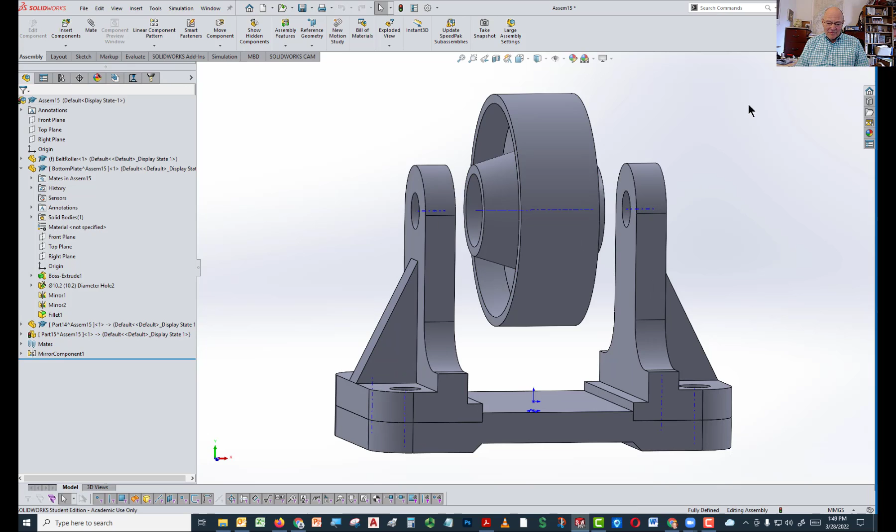Now I have the wheel, and it's just sitting down here at the moment, and it's not possible to move it. Why isn't it possible to move it? Well, I hadn't built this before, and that was a bit of a surprise to me.

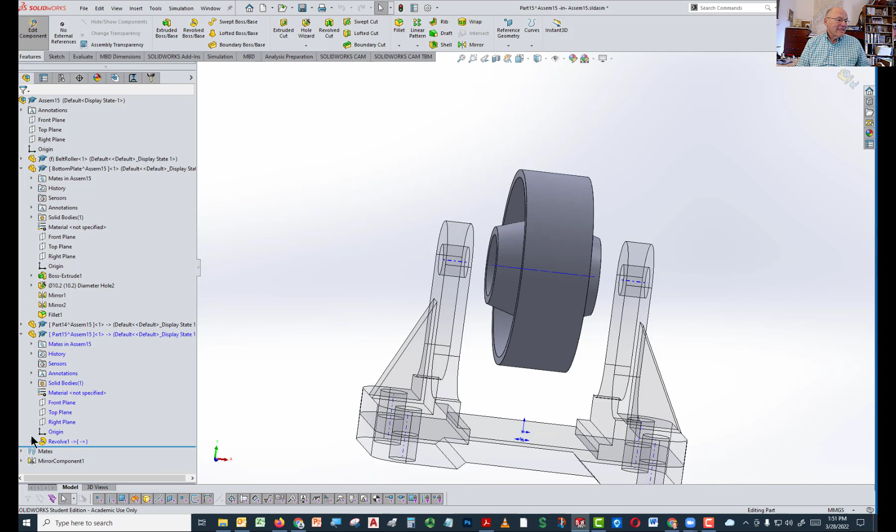So I'm going to set it up for drawings, which means we want it dead center now. I'll go back into the part I just created and edit it. Inside that part I'll edit the sketch so it lines right up with the origin. Once I've done that it should be fully defined, which it is, and it's also dead center.

So later on, when we get done, I'm going to try to see if I can create a configuration where I change that. But we'll see, I'll have to look into that.

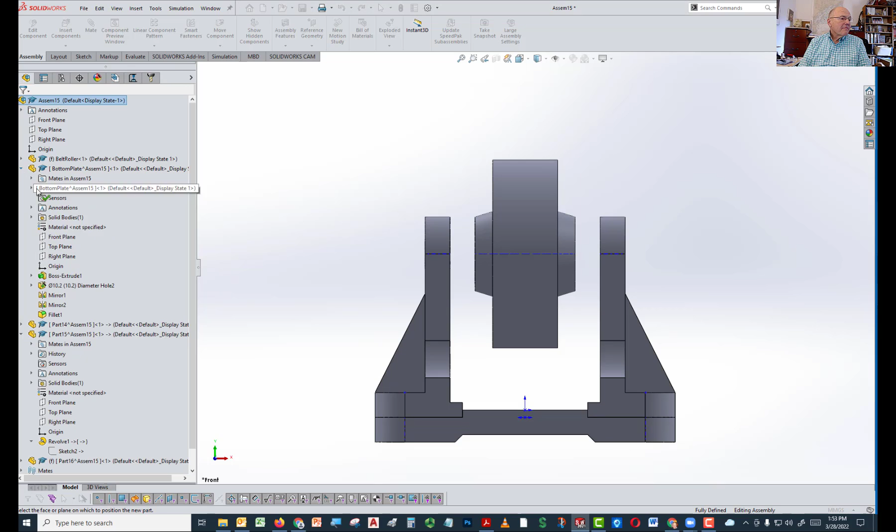Now we've got it dead center, so everything else is going to come off of that. Let's make the bushing now. We'll go back to Insert Components and make a new part, this one's going to be the bushing. Once again I'm going to draw on the front plane of the base plate, which is right at the bottom plate. Right there, there's my front plane. Now we can start drawing.

So we're going to make a bushing, and I'm just going to make it the same size as this. On this one we'll use this center line and rotate around it, although that's another case where we'll see. I think I can rotate around that center line. We'll see. I'm going to do a sketch.

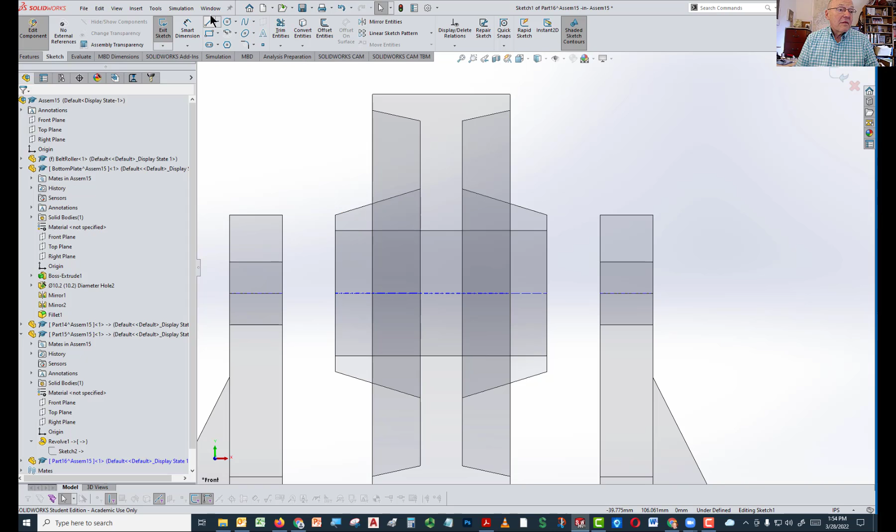Starting here, the bushing has a hole in it as well, and the hole is going to go out until it touches that, then come up... no, not quite. Let me see, oh I see. I'm going to sketch from here, come back out past this a little bit, and go up past this a little bit as well.

Let me see if that's the same size as the base. It is. So I'm going to match this up with that corner right there so it changes when that changes. I'll come over here, down to here, then in like that, down to here. Now that's a little wider than it really needs to be, so I'll move this up a bit. The bushing is going to look more or less like that.

You can see I snapped to the indications I want to use as a way of controlling the size. Now I won't be able to go in after the fact and put actual classes of fit sizes here, this will have to be driven by the wheel. But it's still a good way to go if what you're trying to do is make sure changes in one part get reflected in the others as well.

The dimension on this overall is 21 millimeters. Got to type it in because I forgot to change my units to millimeters.

Now I'll go back to the sketch on the new part I'm making, right click, edit that sketch, and put the rest of the dimensions in. From here to here is 16. And then from here to here. Alright, I'm going to put a center line on here.

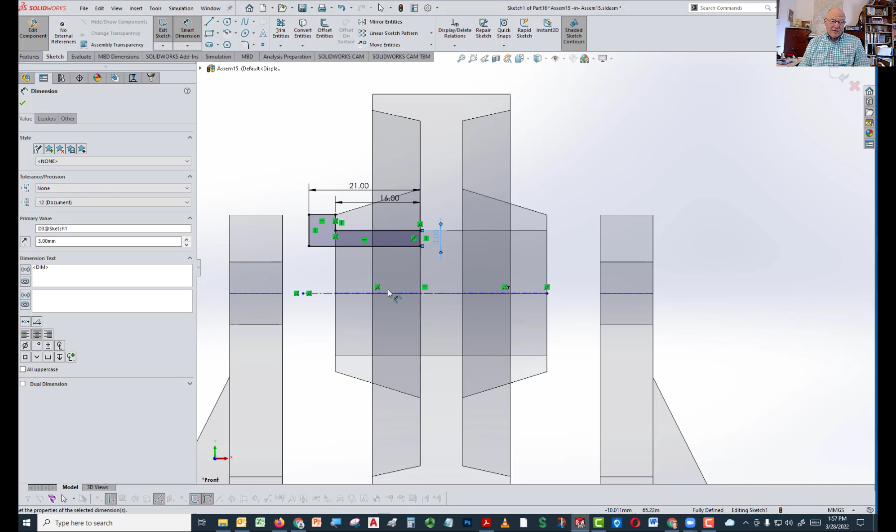So we'll go ahead and do that. And now the diameter of the hole, here's the problem with that though. The diameter of that hole now is going to be controlled by the diameter of the wheel. That's probably not what I want.

So I'm going to go back and just do a little bit of math and say, okay, let's make the dimension from here to here. We'll bring it down here. And we'll make that dimension the 24 minus 6, or 18. There we go. So it's the same dimension that we would have had otherwise, but now that hole isn't going to change size as we change everything else.

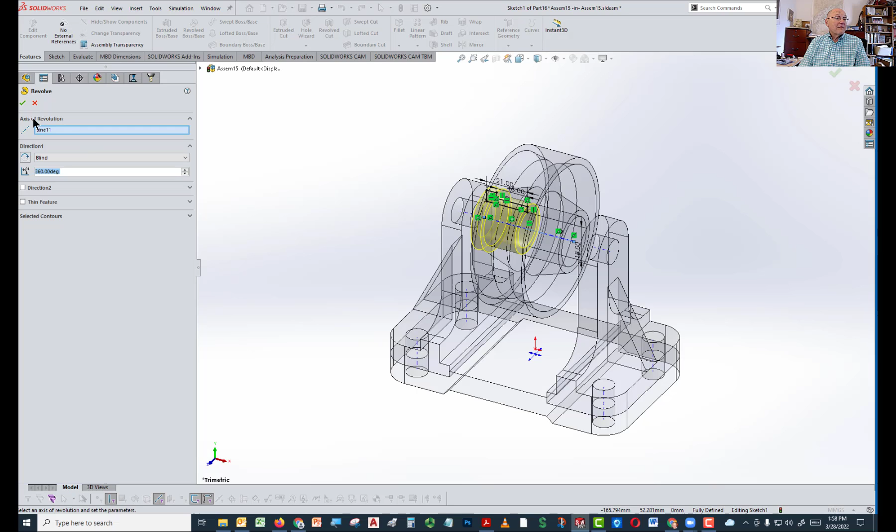Again, this is all in terms of trying to think down the road as what you might want to change as you're going through all these things. Come back out to features. We're going to do a revolve on this one as well. The revolve is right there. Bingo, I'm done. Come back out.

Now we've got the bushing in there, and the bushing is where it needs to be. We would mirror the bushing. We'll do that right now. And again, I'm going to mirror it around the base. So we go to the mirror command under features, or under assembly, and that is under linear patterns.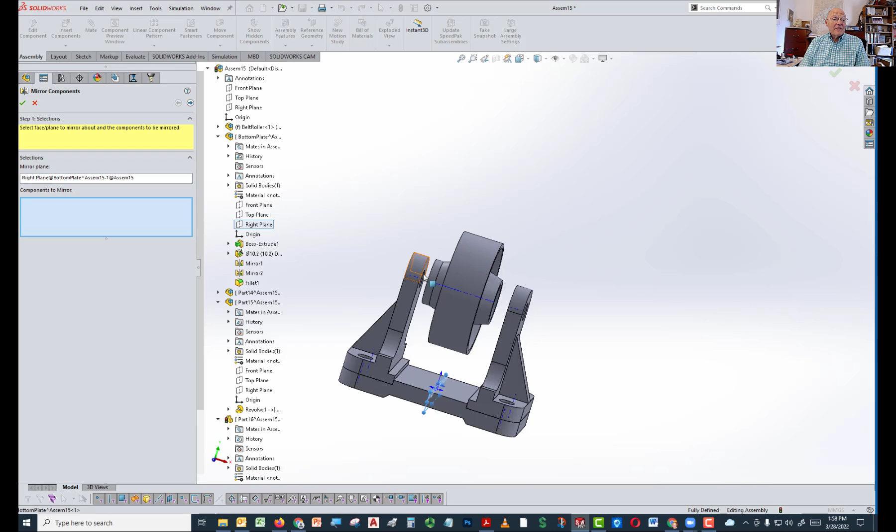Open this up inside, find the bottom plate, find the right plane in the bottom plate, and then go in and just say mirror that, bring it over like so. Now we got that part.

So the only thing left to do on this, except the fasteners, which I'm not going to bother to do, the only thing left to do now is the axle. It's getting into becoming a fairly long video. But I wanted to show you as just doing this from scratch without having done it before and make it as slick or as efficient as possible. Just because this is the process you would go through if you were trying to design something like this in such a way that one part was going to control the others.

Let's just throw the axle in there. When I do the axle, I'm going to start and do it in the same way. I'm going to draw it on the front plane. So it's a new part. When I want to know where to check this off, I go and find the front plane of the bottom plate. Looks like this. We'll look at it from the front again.

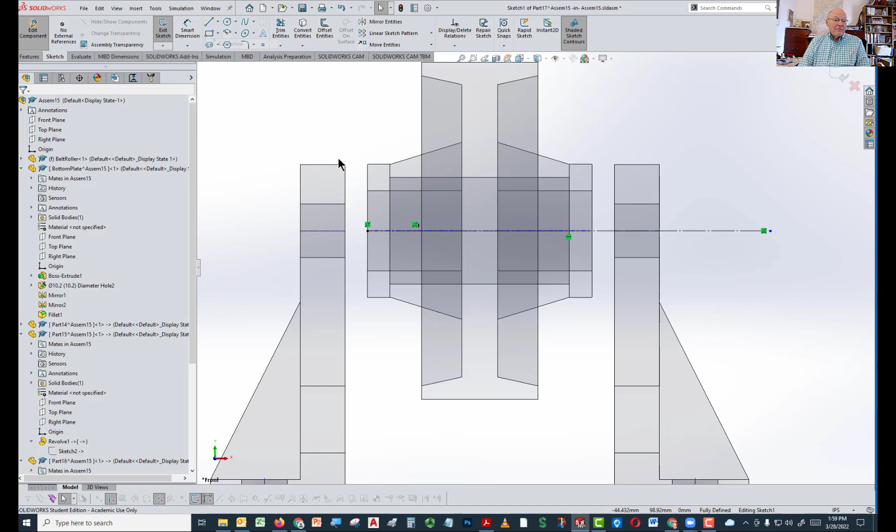And once again, I'm going to draw a construction line that goes right through the center axis of the wheel. Let's make sure it's a construction line, so it's for construction. And now we'll draw another one that is based on the origin right there. It comes right up through like that.

So now I can draw my axle and I can mirror it one side to the other, and I can make changes only to one side if I want. So this is going to start here.

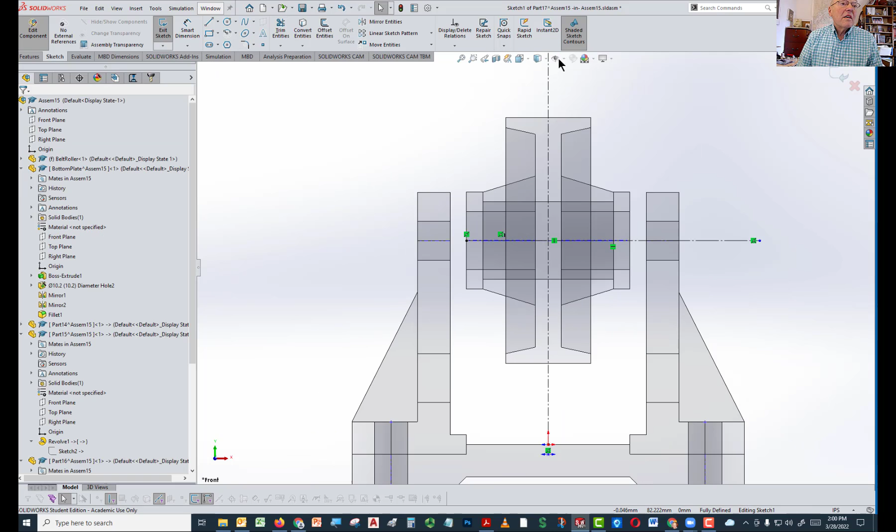Well, I don't want that to be the midpoint of that line at all. What I want is it to be on that line and also on the center axis of this. So I'll...

Go to the sketch command and the line command. What I'm going to do is bring this out like this, and then I'm going to put that line back down on there. I'm going to make a relationship between the two. It didn't have an automatic relationship. I'm just going to make a relationship. This is going to come all the way out to here.

Now it's going to go up, come back, and then go up again. And it's going to come right down through here. And so the sides of the axle are going to be controlled by the sides of the hole in the bushing. We'll bring that right back over to here like that, and then leave it open.

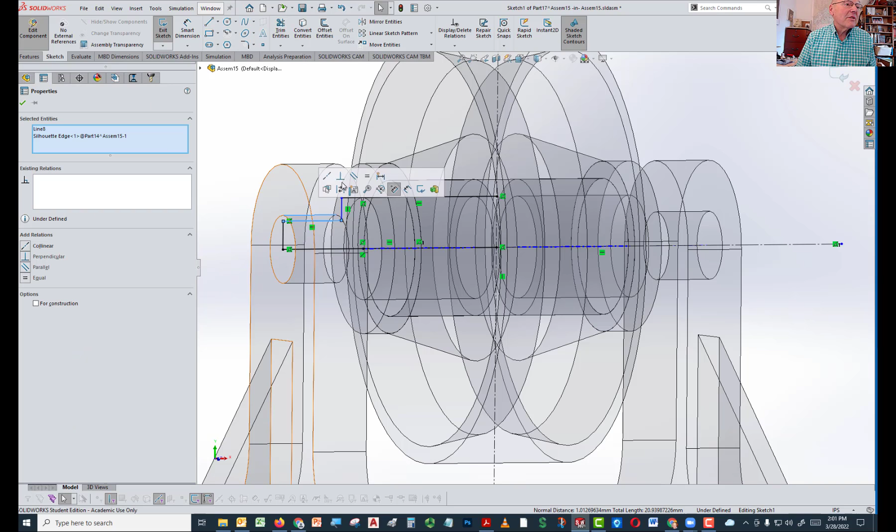And now I'm going to make this and this collinear so that it sits right on the center. Now the dimension for that, well, here's another case where we probably want that set to be 12, so we want that to actually be the same as this, so we can make those two collinear as well.

Now looking at it from the front, the only thing we don't have built in is this, and that looks like it's 15 from the end. And here's a case where probably what we're going to want when this whole thing goes together...

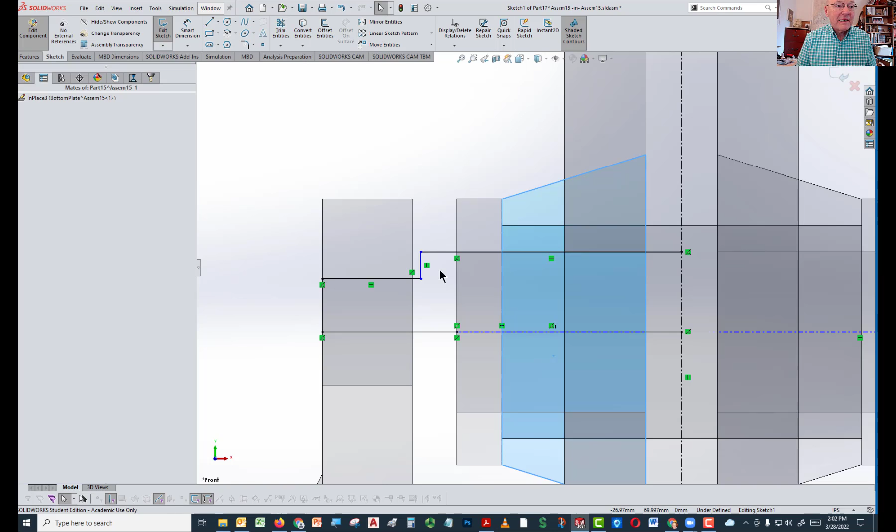This is interesting that it doesn't fit together the way that the assembly on the one we're using showed. But let's just say we wanted to maintain a certain distance here all the time. What I would do here then probably is put a dimension in from here to here and say let's make a 2 millimeter distance here, maybe even a 1 millimeter distance, something along those lines. Now we have a fully defined sketch.

I'm going to mirror it to the other side.

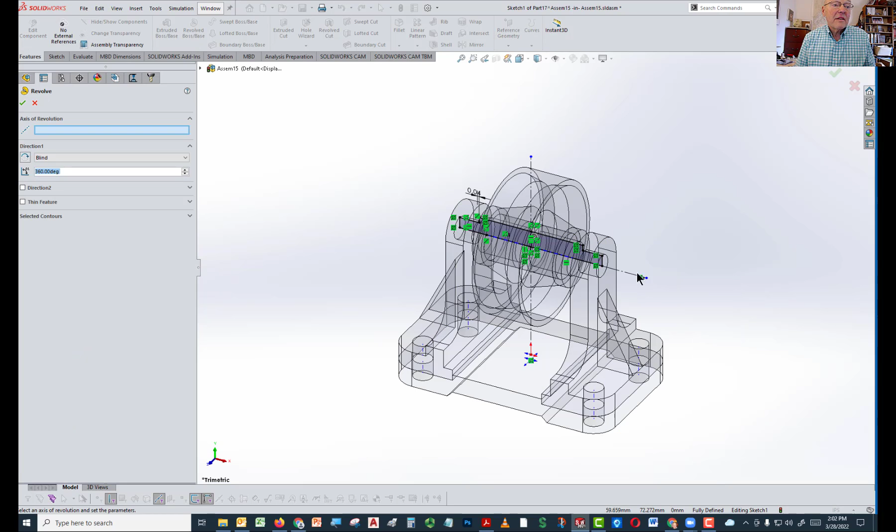And the mirror about line is going to be this one. It comes over here like that. Now we still have a fully defined sketch. We'll go over here to Features and do a revolve, and that revolve is going to be around here. Now we have the axle coming in, and we can try a few things out.

Let me just use a few more minutes. If I were to look at this and do an interference check, there should be no interferences here because everything was matched up to the individual parts themselves. But the value of having done this is this.

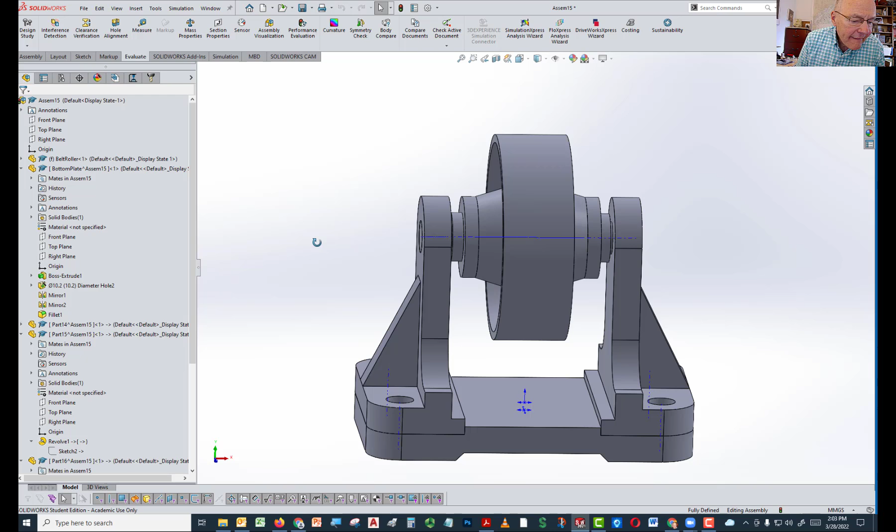Our goal is to have those things come here. One of the things I probably should have done is built a chamfer in on this part right here. I can edit that right now. Let's do that. Put a chamfer on that edge right there.

It almost looks like that sticks out a little further. What I would probably have done then is not match it up here, but put the chamfer in here now. So we'll go to Features, Fillet, get the chamfer tool, chamfer that edge, and chamfer this edge.

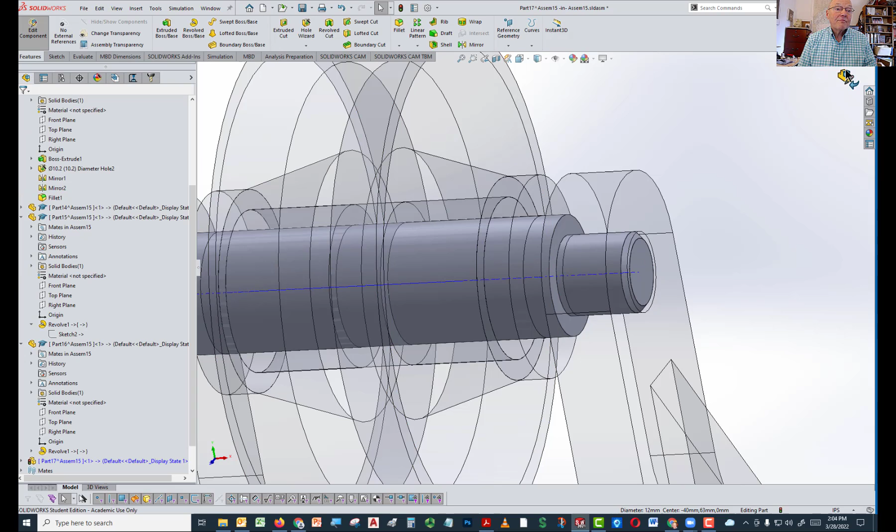It doesn't specify the chamfer on that, so what I'll do is make the chamfer 1.5 millimeters. Let's just make it 1 millimeter. Now we'll come back out. Alright, so that's what we've got right now.

Everything is put together. So what I want to test now is what happens when I change the base. What happens to everything else? If I did this right, when I change the length of that base, it's going to change all the components, including the axle, and leave the wheel where it is, and the bushing where it is. But the axle should get longer.

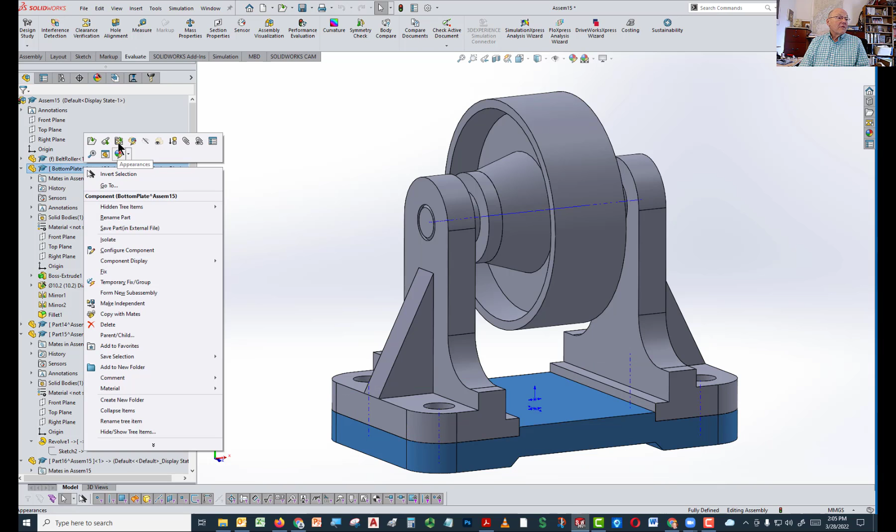Those things should move. So we'll go back to the sketch under bottom plate. But first we're going to edit the bottom plate. We'll open up the sketch for the first boss.

Now let's just make this something kind of extreme. So instead of 120, let's make it 200. Let's see what happens. So we make that 200. Obviously it gets a lot longer. Come back over here, come back out of this, and the whole thing gets longer like that.

And what happens to the rest of it? It does this. Oh, okay, so the whole thing gets longer, but what I didn't change was that middle piece in here. So let's go and do that. That's what's going to really determine it.

Can I do that directly? It has to be saved. Let's save it and see. I'm just curious if I can directly. This is an assembly, we'll do that. It's going to save everything internally. So can I edit that sketch right there?

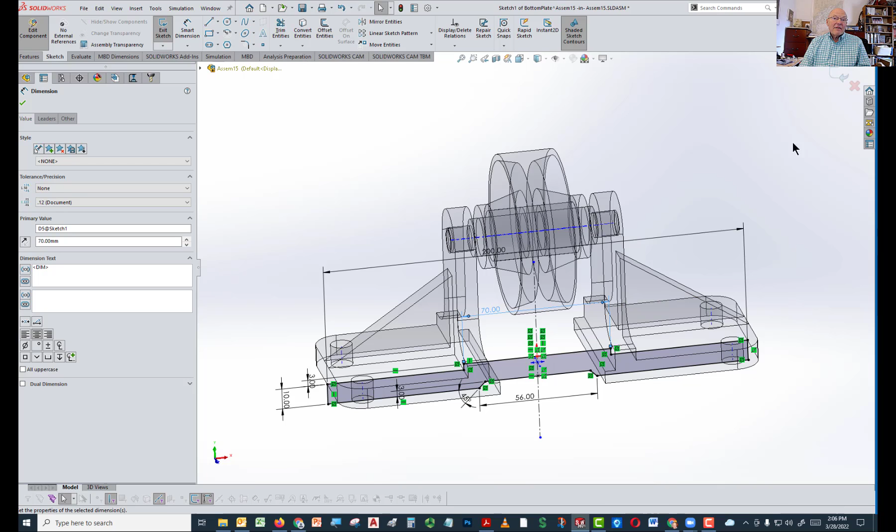Yep. So what I'm going to do is make this now 70. Now I come back out, come back out of here. Yeah, and so you see what happened now. Not only did the overall length control where that was, but it also moved this when I made this bigger, and it made the axle larger as well.

Anyway, that's the point of having something that is top down. And the other changes I make, I'm quite sure, would do the same thing if I made a change to the wheel. So let's make the change to the wheel just for the heck of it. We'll change the revolve, edit that sketch.

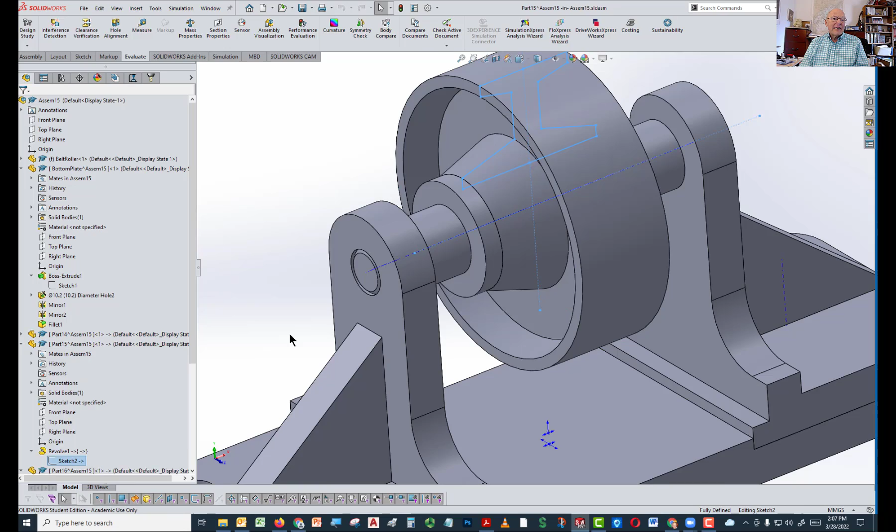And right now the hole in the wheel is 24. Let's just make it, 24, let's make it 20, make it substantially smaller. Come back out, and let's come back out again. Now let's take a look at it cut in half and see if everything changed.

And it did. Everything did change. In fact, that got awfully thin, so here's a case where I would also want to change the diameter going through here. Anyway, that's the idea of top-down assembly.

And again, it's not something that people do all the time. In fact, most of the shops that I know don't do a top-down assembly unless they're doing a fairly complex layout, in which case they start with a layout instead of starting with an individual part. But that's the difference between top-down and bottom-up assembly.